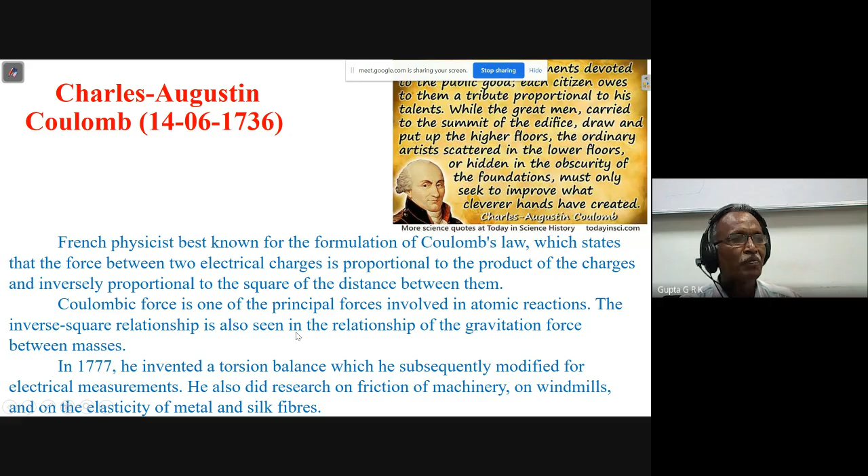Okay, today we'll start with AutoCAD, hoping that all of you have installed it. So I'm going to teach it, and after seeing it, maybe you can try.

If it were a regular offline class, we used to take you to the computer science lab, and all people would be sitting on the desktops independently, and we used to demonstrate, and all people used to practice. There used to be many PhD students and MTech students guiding the people, so if somebody had some problem, immediately that person would come and clarify the doubt, and we used to proceed like that.

But now, because it is an online class, that is not possible. So I will tell everything point by point and demonstrate it. And if there is any difficulty, I will try to demonstrate any number of times till it is clear to you. Later, you can follow the video and practice by yourself.

Anyhow, for our generation, we are afraid of computers, packages, and all. But you people are familiar with laptops, desktops, and even packages. So suppose if we take a mobile, an electronic mobile, we are completely new to it. For every small thing, every small feature, I take the help of my daughter or son, or the students around me - how to copy it, how to move it, how to send it, how to get it - every small thing. It's difficult for me to just find out how to do it, and I take the help of other people.

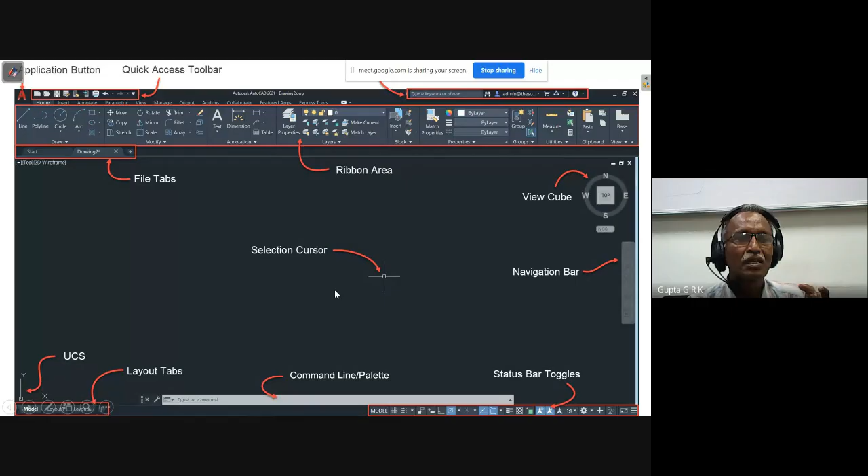This is the drawing area, and we have this cursor, and the cursor will have this plus sign and a small square in between, in the middle. When the square is there, no command is in action. Once you start giving some command, during the command this square will not be there - that is, there is some command in action.

And this XY coordinate system, this is called UCS, means user coordinate system. And here we have the command line, where you have to type the command.

You can have two choices - either you can choose from the icons, any command, or line command, you can type a command, or you can choose the cursor menu. In the menu icon, you can select.

And there is what is called a status bar toggles - this is also important. If you want a grid-like thing, you have to click this. Whichever is blue, that is selected, that is on. These are called toggle switches - it can be on or off. If there is blue color there, it is on. If there is no color, then it is off. So there are different options there.

It is like, suppose two perpendicular lines are there, this is ortho mode. Ortho mode means when you draw lines, you will get horizontal lines and vertical lines when you draw - perfect horizontal and vertical lines. Without taking that, if you want to draw a horizontal line, it may not be perfect. There may be some 2 degrees that side, or half a minute downside, or something it may come.

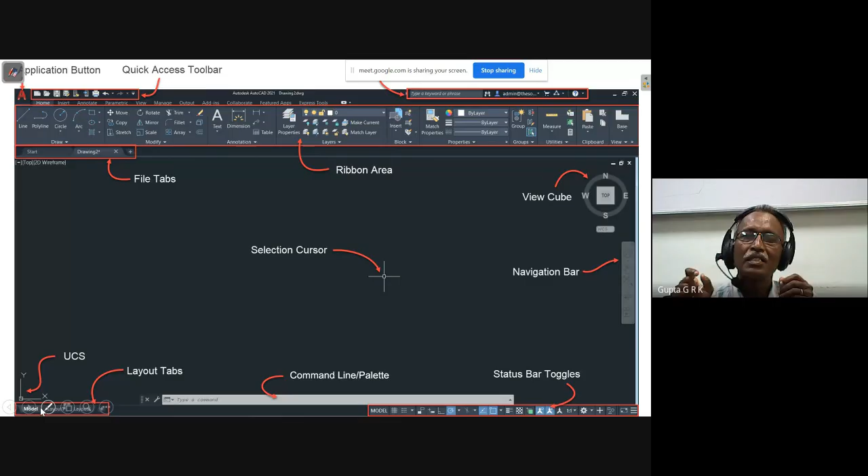If I want to select an end point or middle point or an intersecting point, exactly that point you cannot find out by using the cursor alone - the exact point if I want. If I use the object snap, when I take the cursor near to that, that gets highlighted. We will see all of them.

So like that we have various things there. Here the view cube is there - if you want to view from east side, west side, north side, or south side, how the object will change, you can see it. But whatever we are doing are 2D drawings, so we don't need all those things. When you do 3D drawings, that view cube will be useful.

There are toggle switches for all function keys. As I told you, F6 toggles between ortho, Cartesian, and polar coordinates. If you want a grid like graph sheet, you have to use F7. You can either use the icon or just type the function key.

For ortho mode, if I want to turn it on or off, if it is on it will turn off, if it is off it will turn on, just by clicking the F8 key. F9 toggles snap mode, F10 toggles polar tracking, and F11 toggles object snap tracking. So there are different things available.

F5 we will use in isometric projections. If I want to draw on a top plane, right plane, or left plane, I can do that. F5 will be useful for that. These are the various function keys.

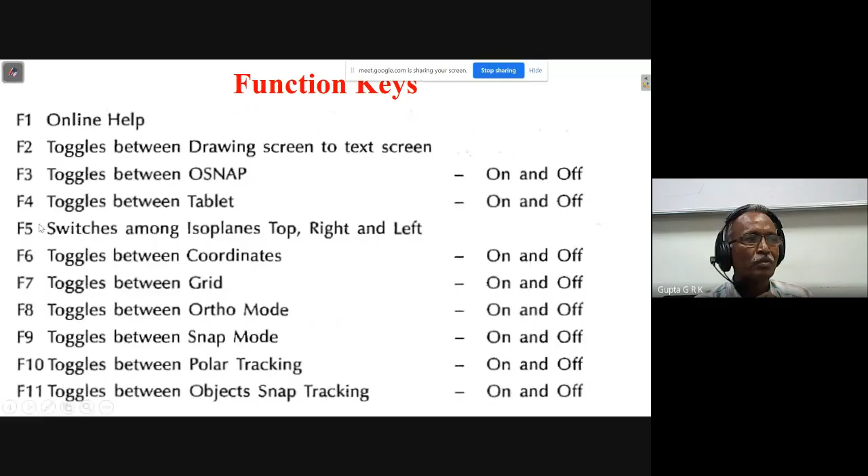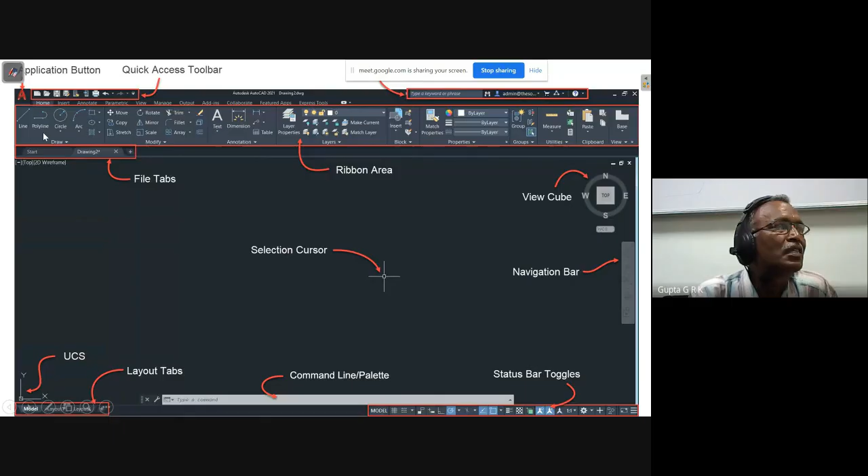So we have different options like that, these are called modify commands. So that we have seen here. Here are the draw tools and modify tools. You can see line, polyline, circle, arc, rectangle, ellipse - these are the commands. And in the modify section you have move, copy, stretch, rotate, mirror, scale - all these are there.

As I told, either you can choose the particular icon, or you can type the command in the command line. When you do, there are different methods like absolute coordinate method, relative coordinate method, and polar coordinate method. If I want to draw a line from one point to another point, you will have some coordinates.

You can give coordinate by coordinate points, or I can give the lengths also - different ways are there. One is the absolute coordinate method. In this method, the points are located with respect to the origin 0,0, and the syntax is you give XY coordinates. For the starting point it will ask, you can give XY coordinate, and for the ending point it will ask, you give XY coordinates, so that it will draw a line. Like that you can draw line by line by giving the absolute coordinates.

There is also the relative coordinate method. In this method, the displacement along the XY axis is measured with reference to the previous point. So from here to here I have drawn a line, and from here to here if I have to draw another line, the end point I can give with respect to 0,0, or with respect to the previous point. So horizontally I have to move some 10mm, and vertically some 20mm like that. I can give the relative coordinate using the at-the-rate symbol, and XY means from the previous point, the new point is obtained by moving the X coordinate by this distance and Y coordinate by that distance. This is called the relative coordinate method.

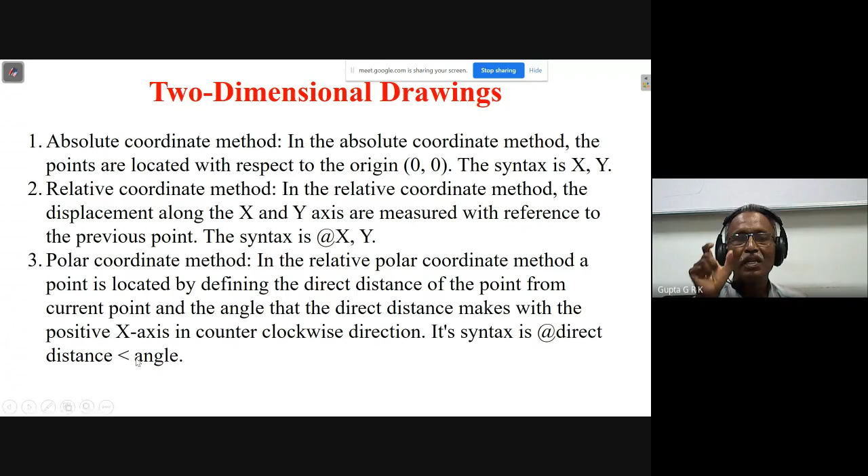End point you have to give. So how much it is, because it is 20, 20, I have to add 80 in the x direction and y direction 0. So 100, 20. In the x direction I add 80, in the y direction 0, so 20. That is the next point.

And the next point, when you go, I have to go from this point to this point. I want to know these coordinates. Because this x is 100, and y here is 20, so vertically 30 I have to go, so 50. So 100, 50. Third point, 100, 50.

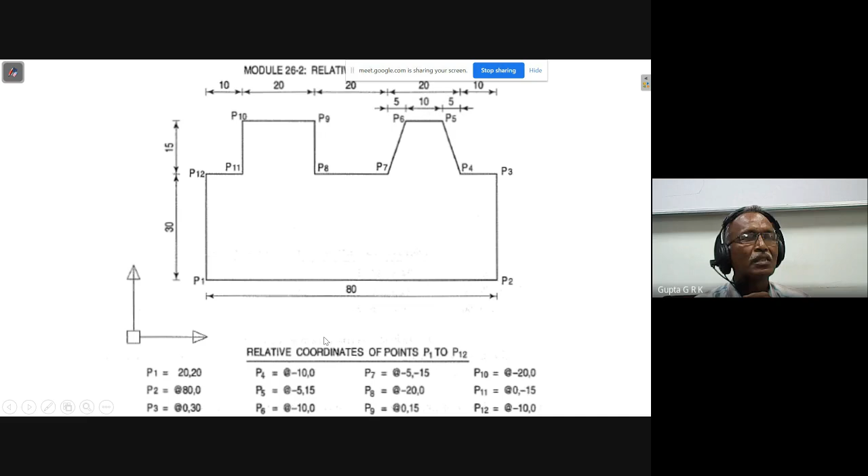And when I go to the third point, again I need not know the exact coordinates of point 3. From point 2, how much I have to move in x and y directions. So it has to be x direction 0 only and y direction 30 I have to move. So 0, 30. And from here to here, 3 to 4, this is negative x direction, so minus 10 and y direction 0. Like that I have to give the relative coordinate system points.

And suppose I do it in the polar coordinate system. Again P1 is 20, 20, and for P2, what do I have to give? I have to give the distance 80 and what is its angle? Angle of the line with the positive x-axis in counterclockwise direction. The angle is 0 only. So I have to give at-the-rate 80 less than 0.

And from 2 to 3, what is the distance? Distance is 30. And what is the angle of this line? It is 90 degrees, from the positive x-axis in counterclockwise direction. So 30 less than 90.

And P3 to P4 - I will tell some 4 to 5 points extra because you have to know the angle exactly. So P3 to P4, I have to go in the direction and distance only. I need not give minus 10, only the absolute distance I have to give. Distance is 10, and what is the angle? It is going in the negative x direction, so the angle is 180 degrees. So 10 less than 180.

And from 4 to 5, if I go, this distance given here is 15. And what is the angle? It is 108. So I have to give 15 less than 108.

And for the next point, from here to here, P5 to P6, the distance is 10. And again it is going in the negative x direction, meaning 180 degrees. So 10 less than 180.

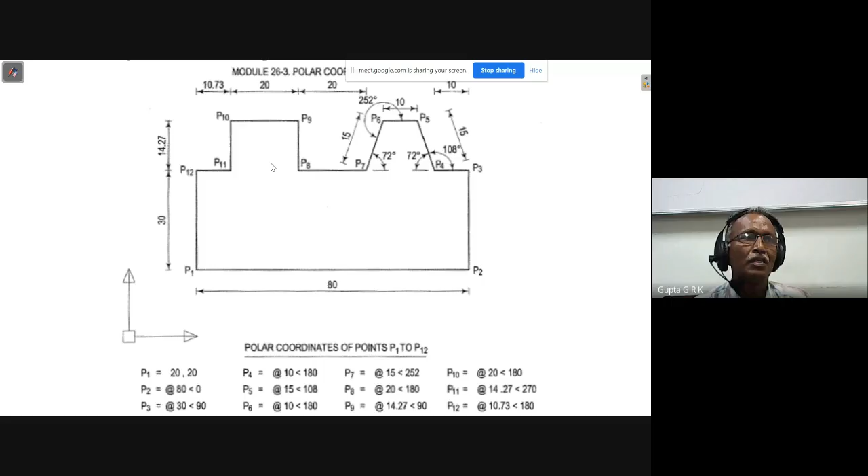Either if you know the absolute coordinates of that point, you can give it. And if you know relatively from this point to that point, what is the movement, you can give it. Or if you know what is the exact distance and what is the angle of the line, you can give it. So any data it can understand, it will do that. We will go to AutoCAD now.

Now if you installed AutoCAD, you will have this particular icon on the desktop, and I am just double clicking that, and it will open it. It may say to increase your resolution or reduce the display scale, it's okay.

So this is the way we are going to get it. As I told already, I have shown this particular desktop in the slide, so you can see this is the application, this thing.

And I told if I click on this, you will get this new, open, save and all. New, open, save, save as, import, export, publish, print, all these commands will be there. And the same things here. If you keep the cursor on any icon, you will know what exactly it means. So open, save, save as, like this you can have this. This is for printing, and this is for undo, undoing something, like that.

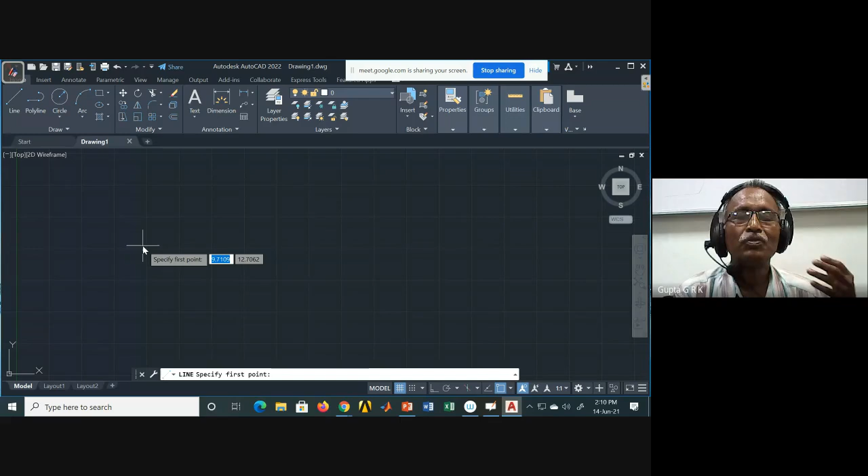And if I just click on line, I'm clicking on the line and bring the cursor here. It is not selected now. Okay, now it is taken, you can see the cursor, that square in the middle of the cursor, it is not seen. Again I am clicking escape to cancel the command. Always, if you want to break a command or cancel a command, always press escape. It is better if there is any trouble, first you type escape once or twice, suppose because you will not know some command is in action.

So if you just click on escape once or twice, that will be gone and you will get a fresh one. So here I am typing escape, you can see the cursor, now there is a square in between the cursor, in the middle of the cursor, so that means there is no command in progress. And I am clicking on line, and when I am clicking on the line, you can see on the command line, specify first point.

It is asking specify first point, and actually this is a dynamic cursor. There, for coordinates, you can see when I am moving this, the x coordinate and y coordinate, they will be changing. I can type, suppose if I type 50, that is x coordinate, and for y coordinate, you can put some 30 like that, enter. And specify the next point.

So this line is actually drawn, but it's going somewhere out. How do we fix this view? There are some things you can do with the mouse. If you press the center wheel, you get a hand-like cursor - this is called the pan command. Pan command is in order, so I can move this line to anywhere on the screen. This is called pan - just press the roller and move it.

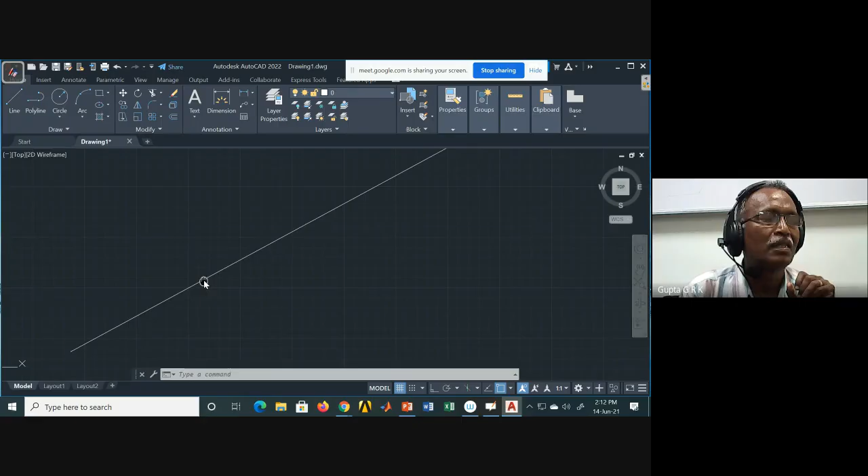When you press the roller, it becomes like a hand. So it picks that, and I can move it anywhere on the screen - this is called pan. And if I move the roller up or down, clockwise or anti-clockwise, this is called zoom in and zoom out. I'm just rotating the roller up and down for zoom in and zoom out. So like this, you can do it.

So I'm canceling this line. If I want to delete the line, I take the cursor over it and click - always clicking means left click only. So this line is selected, this object is selected, right? If I click delete, that will be gone.

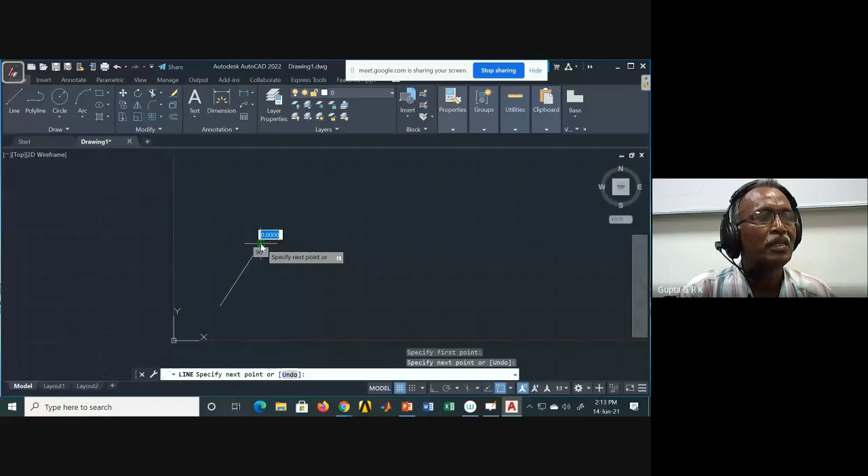So again I am taking the line command. Specify the first point, then the second point, and if I want one more line I can continue - third line, second line, third line, fourth line, like that. Once it's over, always stop the command by typing enter. So I have a number of lines drawn, and each line is an object.

If you take the cursor on that, it will be highlighted. This is one object, and this is one object, and this is one object, and this is one object, and this is one object - like that, I have a number of objects. Each separate line is one object.

So if I want, I can move and do some operation on that object. I can change the color, I can increase the thickness, I can move the particular line to another place, I can rotate that particular line, any object, right? Or I can move and rotate all the lines together.

But if I want to do this, I have to select all the lines, all the objects, and then make them like a single object. How to do that? I can join all the lines - there is a command called join. Join, enter. It will ask: select source object or multiple objects to join at once.

So take the cursor on this particular first line, click it - selected. So one object is selected, next another, next another, next another, next another, next another. So these objects are selected - 6 objects are selected, it is shown. Now once the selection is over, press enter.

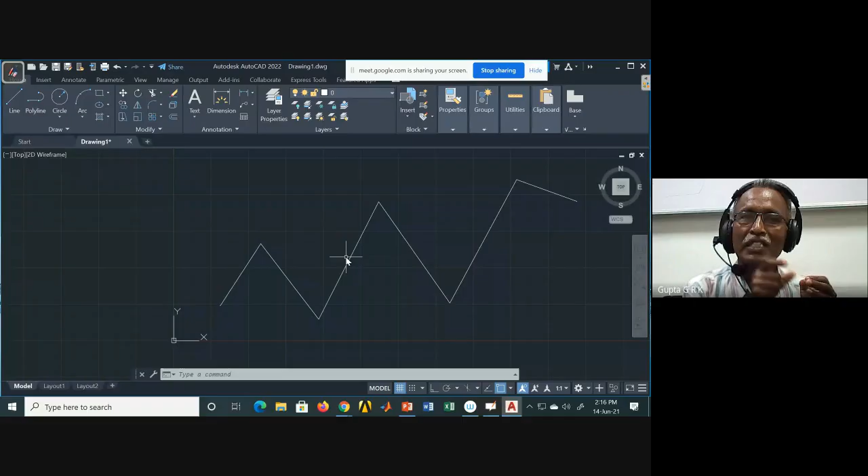Or if I want only one single line to be moved or rotated, how do I do that? Because everything became a single object, I can separate them by using what is called explode.

EX - if you type that, whatever commands are there, you can see and select it: explode. Now select the object - it's only a single object, I selected it. And once the selection is over, enter. So yeah, it is exploded, meaning all the objects get separated.

Now you can see here - this is a separate line, and this is a separate line, and this is a separate line. Like that, I have a number of lines. They are exploded, so it's not a single object now - there are 6 objects there.

And any doubt, you ask me in between, right? Another thing is selection of objects - multiple objects to be selected or deleted or something like that. Because if I want to select, it is only one object I could select here.

Here we have objects and what are called windows. What I do is click here and move the mouse this way - this is a downward window. It comes in blue, and this blue window selects whatever objects are completely covered by it.

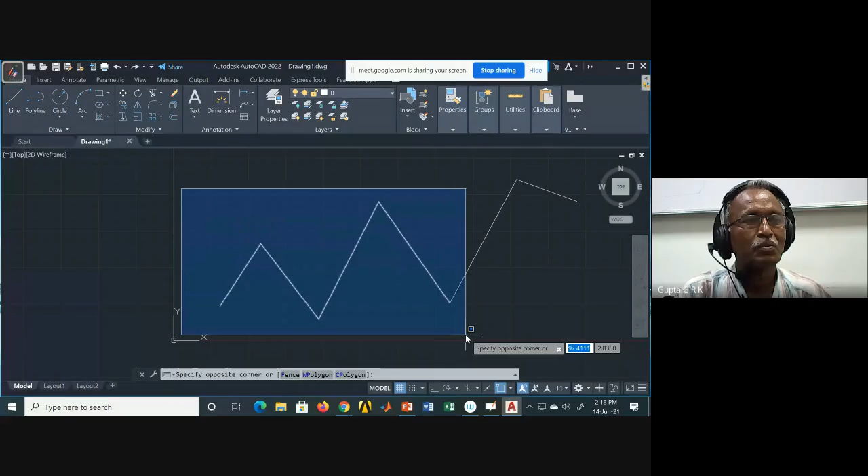I will draw the window like this, up to here, and click it. 4 objects are selected. Whichever object is completely covered by the window will be selected. Now there is another way of doing it.

I am typing escape, not doing anything. Now I take this side, click here and drag this way. This is a green window, called a crossing window. If this window crosses the object, it need not completely cover the object - whatever objects are crossed by this window get selected.

Suppose if I do it like this, how many objects get selected? 1, 2, 3... 1, 2, 3, 4 objects get selected. I will click here - you can see this is also cut by the window. These 4 objects can be deleted as well.

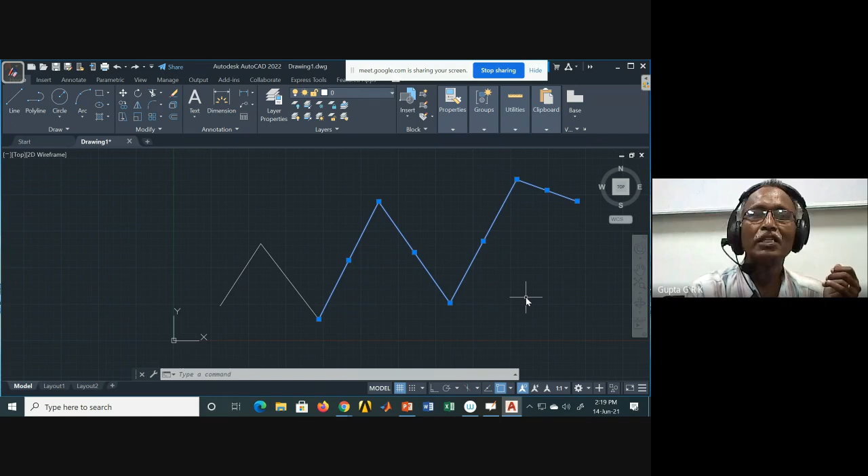So we have the blue window - if I drag it down from left to right. The green window, if you drag it down from right to left, you get the green crossing window. If it crosses any object, that object gets selected. The blue window selects an object only if it completely covers it. That is the way you select objects.

I am typing escape. Here I used the command join to join all the lines, but there is another command called polyline. If I take that, it asks to specify a start point. I specify it, and next point, next point, next point, like before. Then I type enter.

If you see, this is a single object - a single object, even though I drew a number of lines. Previously, to make a number of lines into a single object, I used the join command. Now it's not necessary - if I just draw a number of lines using polyline, all of them together become a single object. That is called polyline.

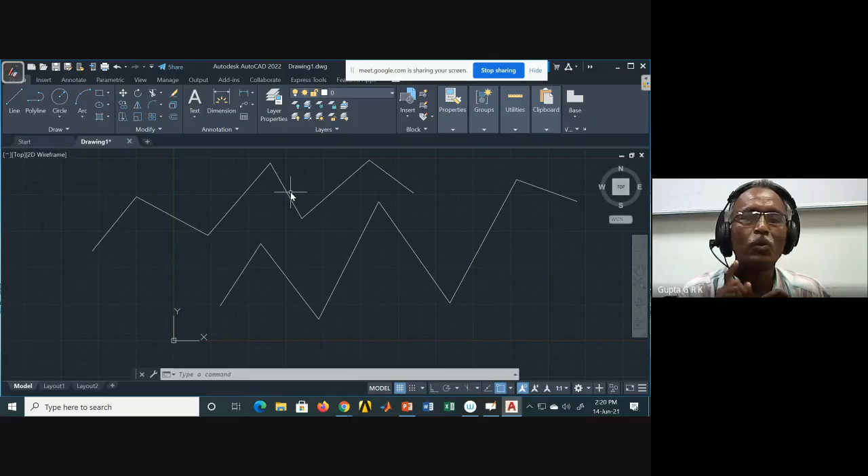Again, if you want to divide them, you have to use the explode command. Using explode, a polyline can be made into independent lines. If I click on it, the whole polyline gets selected, and I am deleting that. If I want to delete, I delete the whole thing. Delete.

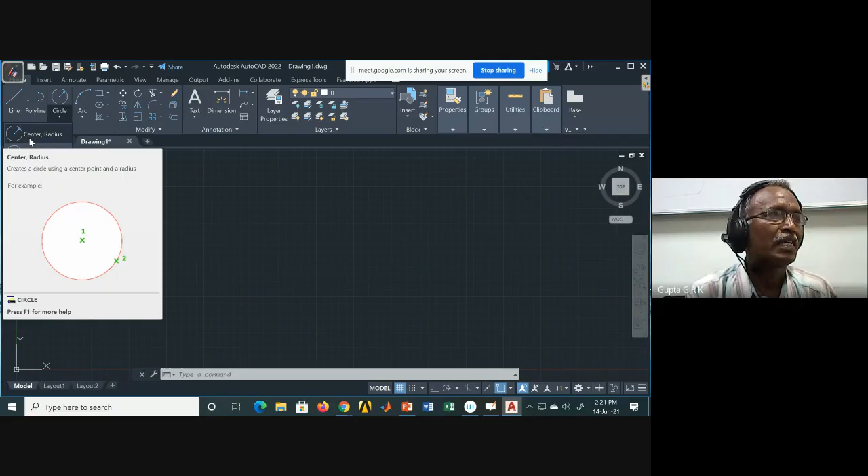Now we will do other object drawing - circle. If I take circle, it asks to specify the center point, and there are many other options. If I escape, below circle there are options: if you give center and radius, you can draw it with that data. You can also give center and diameter to draw like that.

Or if you have 2 points on the circle, you can draw the circle, and if you have 3 points on the circle, you can draw it that way too. So based on the data, I can choose that particular option. I'm taking center radius, so it will ask for the center point - you can click anywhere or give coordinates, then I have to give the radius, either by clicking somewhere or typing the radius.

Just deleting it again, taking the circle command with center radius, I click somewhere for the center. If I want a radius of 50, I just type 50 and enter - it comes like this. Because it's a bigger circle, I just move the roller to zoom out like this. So that's how I can draw a circle.

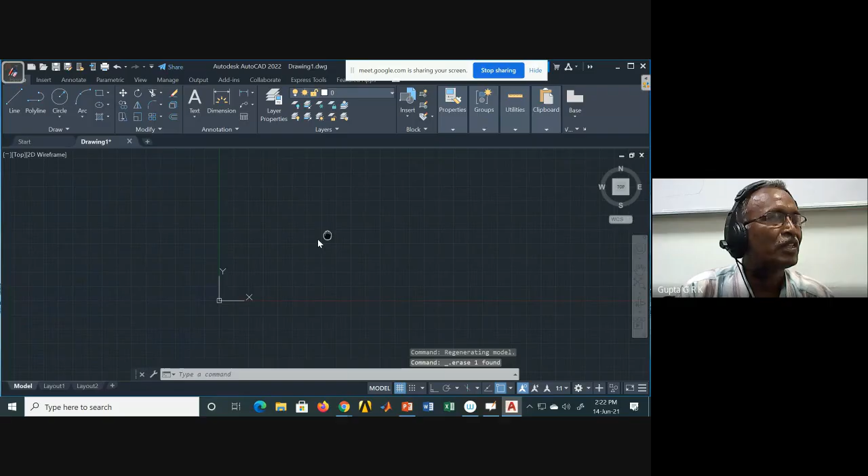Okay, I'm removing this, and I'm moving the coordinate system to this side. And the same way you can have an arc. Okay, a number of types are there. If you have starting point, center, and end point, you can do it. Or starting point, center, and angle, like a sector if I want. So everything on how to draw it, you can see the graphics thing also is coming.

So how to give that data. So here that is coming like that. Okay, that is start point, and specify arc. Okay, like this. Starting point, ending point, and center. Okay, like that I can do it.

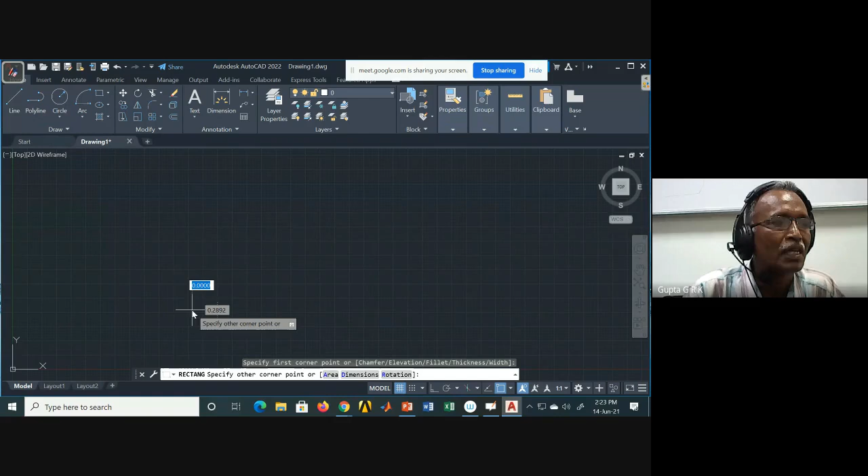And so this is important for us, polygon. So how to draw a polygon? Rectangle or a polygon? So if it is a rectangle, it is asking first corner point. You can give the coordinates or click on it, and then you can get the other corner. Again you can give the coordinates or just click it, and you will get the rectangle.

Okay, like this. Again, a polygon is a poly object. That is, it will be a single object. It is not like 4 single lines. If you are drawing line by line, all 4 sides, you will get 4 different objects. Each line will be an object. But if you draw using a polygon command, you will get a single object. So if I select it, the whole rectangle will be selected like that.

And I can do polygons like this, because these are important for us, polygon. And I want to have a hexagon. So it is asking polygon, enter number of sides. Just you type, suppose 6. Okay, and enter. And specify center of polygon or edge.

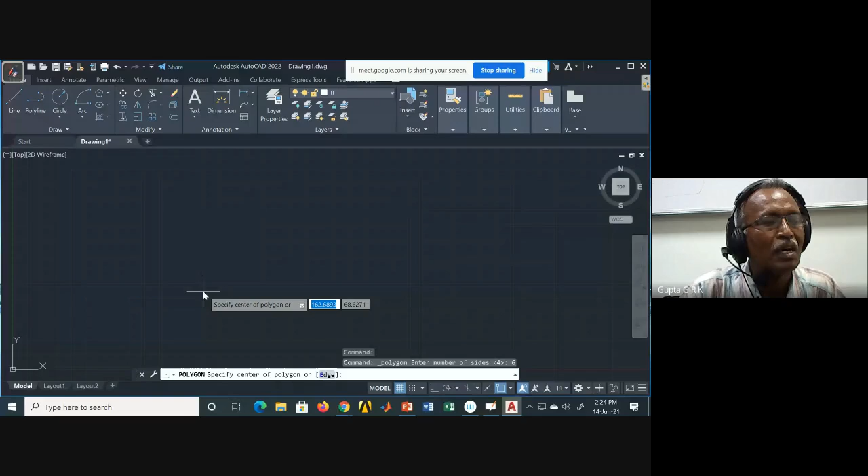Okay, usually in the problems, I will not know the center of the polygon. I know the edge length. So I have to choose this edge. Click on edge here and specify first end point of the edge. Anywhere I can just click on here. Okay, I clicked it, and specify second point. So second point I have to see, based on the second point, it may give any hexagon like this.

But I want one edge to be parallel to xy or perpendicular to xy, either like this or like this. So how to choose it? Then I have to choose this ortho, this ortho mode. F8 you can click, or ortho you can click here. Now you will get one line horizontal like this.

And what is the edge length? I can give edge length because it is changing. If I'm moving this, okay, 59, 60, 70, like that, it is changing. The coordinate, it is changing. Because suppose I want 50, just you type 50. So the hexagon, it will come like that.

And in the same way, suppose I want one side vertical. Suppose I take polygon and 6 sides, enter, and specify one point. I click. Okay, sorry, I have to choose the edge option, right? Okay, polygon, 6, enter. And I'm taking the edge option here. You should not forget that edge option.

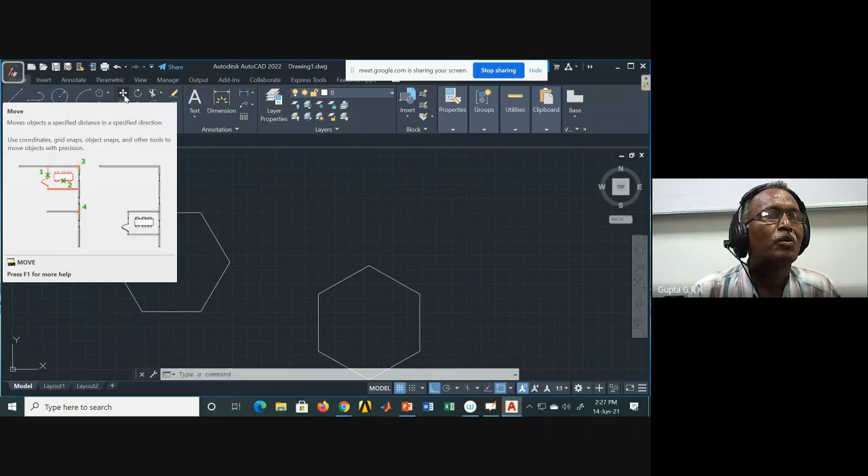Suppose modify tools. Modify tools, this is move command. Okay, if I want to move one object from one point to the other point, how to do it? I click on move, and so it is move, select object, it is coming. So I have to select some object. Suppose this object I am selecting. Click on this. Okay, and once your selection is over, enter.

And so it is asking move, specify base point. You have to give some base point which is to be moved to some other point. So here I choose this particular corner and I click on that. And move, specify second point where this first point is to be moved. So now I can move like this, but it is moving horizontally and vertically because it is in ortho mode. So I remove the ortho mode here, this ortho mode, I click it. Now I removed it. Now I can move this anywhere.

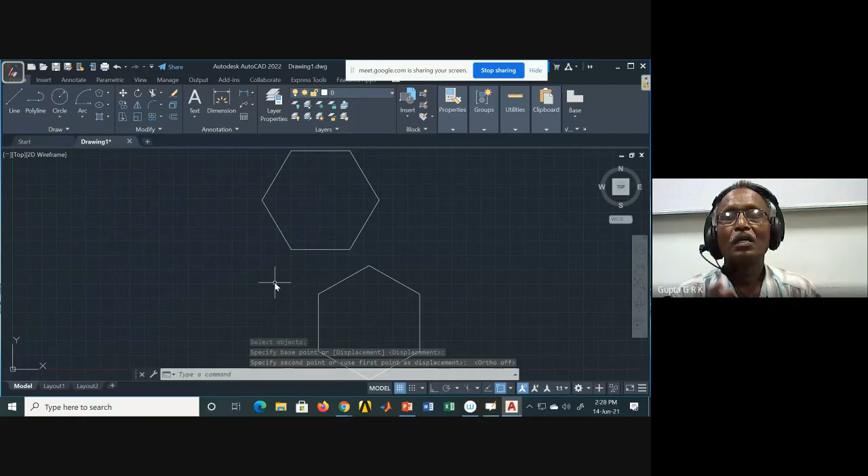Okay, so if I click here, it will be moved to that point. So the old one is gone and I got a new one. But I want to have the old one and the new one also.

Suppose you are doing projections of planes. One hexagon is to be rotated there, but this hexagon is to be there as it is, and one more hexagon I want, and I have to rotate it to some other place. So I have to copy it. How do I do that?

Below move, there is copy. This is copy, I click on that. And it is asking copy select objects, which object is to be copied. So I click on that. Again enter, once the selection is over, I have to enter.

And again, specify base point. So I am specifying this particular point. So another hexagon came. The old one is as it is. The new hexagon has come, and I can put it somewhere.

So I can just click somewhere. And again, enter, once the command is over, enter. So I have the old hexagon and also the new hexagon. This is the way I can copy one object and have another object.

Now suppose I want to rotate the object. How do I do that? One hexagon I am removing, and this particular hexagon I want to rotate. So you have the rotate command here. This is move, and then after move I have rotate.

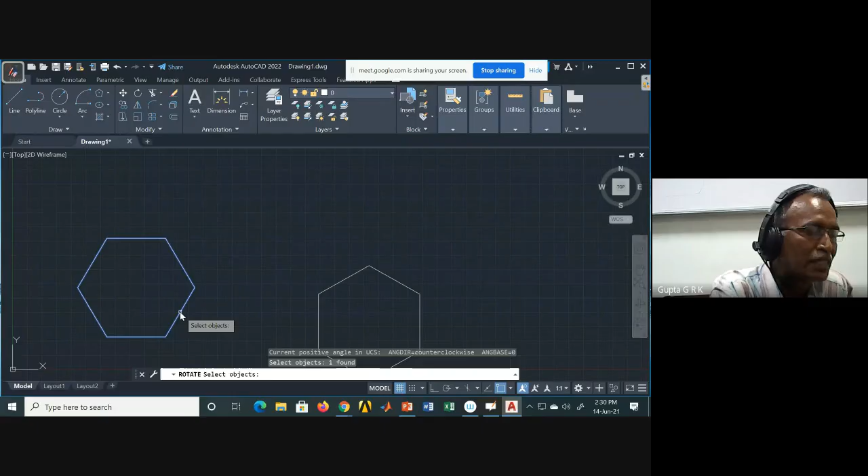Rotate is there, I have chosen that. So it is asking rotate select objects. This object I am selecting, and once selected, enter. So one object is selected, and specify base point, about which point I have to rotate. Maybe this point again I will take. Specify base point. And when I rotate it, this object gets rotated.

But I want to rotate this and copy it at some other point, so I want to have the old object and also the new object. You should not forget this, otherwise the old object will be gone and only whatever is rotated will be there. So I have to take here, there is copy and reference.

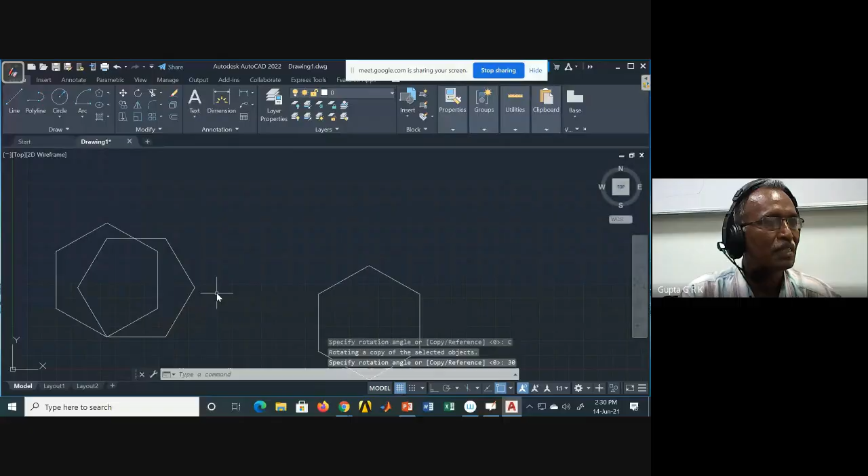You can see copy, reference. Okay, I choose copy. So now you can see one more object came like this. Now it is asking rotation angle, suppose 30 degrees. So I am rotating by 30, enter, typing 30, enter. Okay, now this is rotated by 30 degrees.

I got a new one. Old one is this and new one is this. And now this can be moved, whichever is rotated, that can be moved to some other point.

So again, if I want to move, you can choose this move object and select this, enter, and base point, and again you can move it like this. Okay, it almost came like this vertical one. I will give some other angle.

I will check rotate, selecting object, enter, specify base point, and copy, and I am giving 45 degrees. Now you can see. So now if I move the object: move, select object, enter, enter, select base point, and move it like this. So to whichever place I want, I can move it.

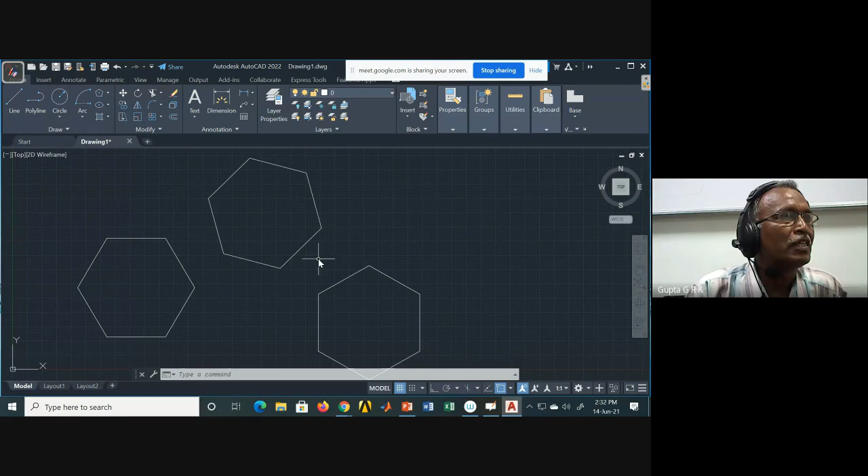This is the way we have seen the move command, copy command, and rotate command. These are the main things that are needed. And suppose another thing also - we will draw projectors, and that additional projector I have to delete, or erase. How do I do that? I will tell some easy method.

Suppose I take line. I draw some line like this, going through this point. Like this I have two lines out there. And this additional line beyond the hexagon, I want to trim it, I have to erase it. So there is what is called the trim command. For this, just type TR.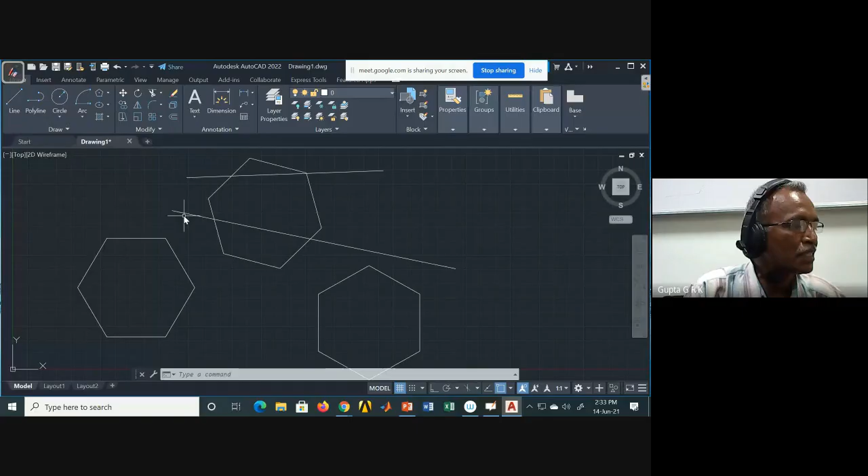Trim, enter. Now this small square came, right? So if I go to any line, and if there is a red cross mark I am getting, if I click it, that line will be erased like this. And here I take onto this, so this line gets erased. I take onto this point, this is erased. And I take onto this.

This is erased. And inside also, if you want to erase, I can move to any object. Wherever I get the red cross mark, if I click on that, that line will be erased. This is erased, right? I can erase that particular portion. This is the way I can do it.

So here, though it is a polyline, I can trim it like erasing one line. But if I type escape, I come out of the trim command. If you see again, it is a single object, right? So like that.

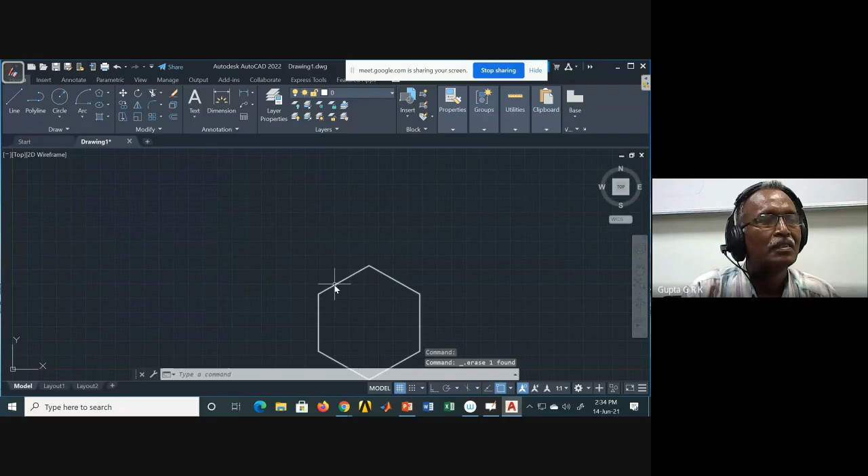Okay, I am removing this. I am selecting, typing delete. Selecting, typing delete, because you cannot see some of the things.

And I can draw colored lines. Suppose here there are properties, properties by layer. If you click on this, I will get colors. And if I choose a particular color, suppose red, and take the draw line command, I will get a red line. And if I draw another color, some green, and take another line, I can get like this.

And I take another color, yellow. I take the line command. Like that, I can draw lines of different colors.

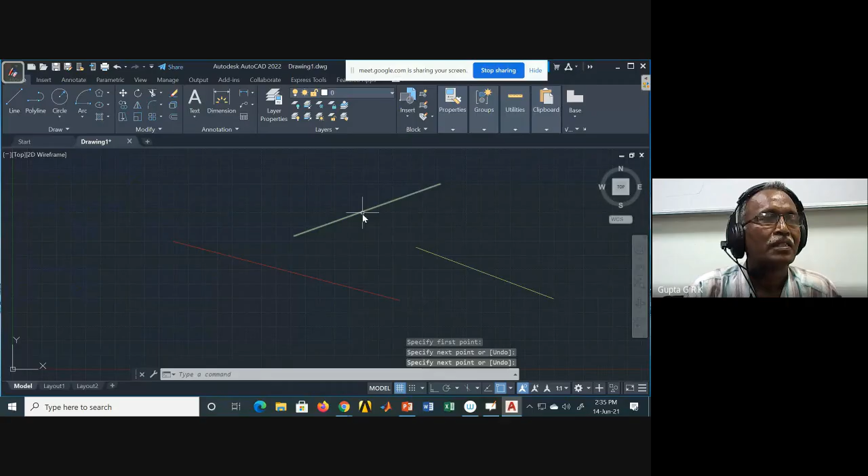And there is another thing also. So what normally happens is, I will draw all the lines, complete the problem, and suppose the final projections or views are to be given one color: front view, top view, front view, top view. In all three positions are to be given some color. I have already drawn everything with white lines. So how to do that?

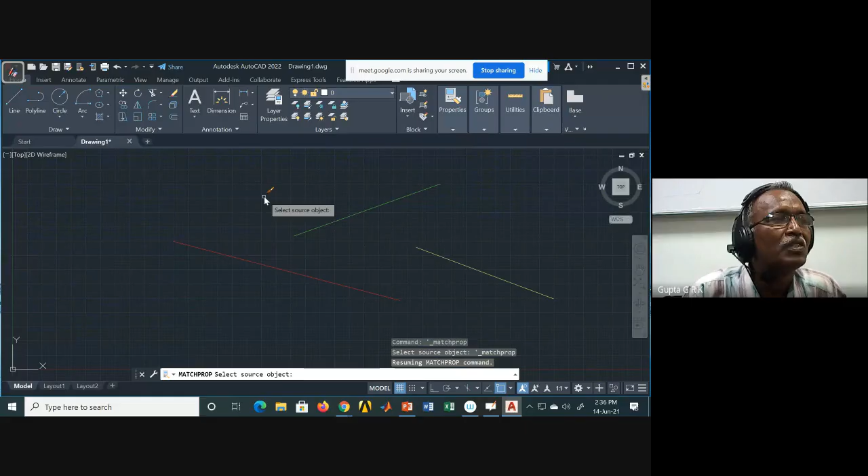Again, I have to over-draw each line, or I can use what is called match properties. If you click on this properties arrow, there is match properties. So match properties, if I select, I click on that. So if you see here, there is a brush-like cursor coming like this, and I can select one of the things -- this select source object, which is the source.

I am taking this, so that is yellow, yellow I have selected. Now I can paint on any other line. I can click on that, and I will change the color to yellow. And this also I will change to yellow. Like that, I can match properties.

One object, the source object, which has its properties, can be taken to other objects. So like that I can change the properties of other objects. This is the way. And once I do that, escape -- that brush icon, the cursor, will be gone, and again the normal thing will be there. So like that I can do.

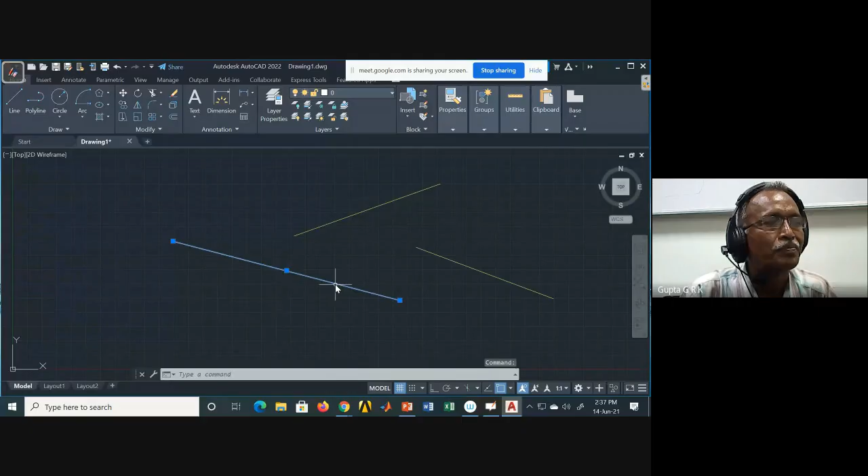Okay, now what I do is I will do a problem, the planes problem, and I will tell you how to go about it. Any doubts you can ask. And so we will take one problem.

Again, hexagon problem only I will take. Projections of planes, second problem: a regular hexagon of 40 mm side has a corner in the HP. Its surface is inclined at 45 degrees to HP, and the top view of the diagonal through the corner, which is in the HP, makes an angle of 60 degrees with the VP. Draw its projections. Okay, so a corner in the HP.

So I have to first draw the hexagon in the top view, right? Because corner it is talking about, so a diagonal parallel to XY. So like that I have to do. So what I will do, I will draw the hexagon. Take this polygon, 6 sides.

Okay, 6, and take some point here. I have to first choose the edge option. So take polygon, 6, enter, and I am clicking on edge here, in the command line. It is asking first endpoint of edge.

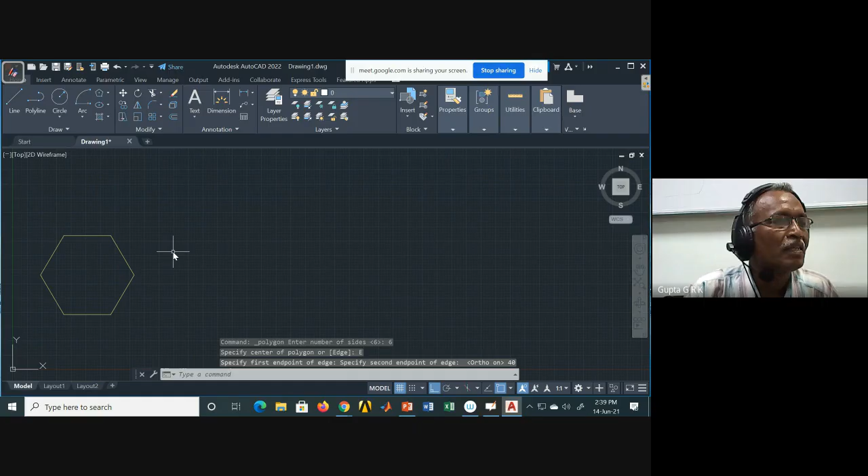and I can pan it like this.

Okay, like this. And if I want, I can move it a little bit to this side. So: move the object, select object, enter, and pick the base point. And I can remove the ortho. I can put it somewhere here. It's nice, like this.

Okay, and now I draw the XY line. So choose the line, click here, and draw a big XY line here. Okay, and enter. So I've drawn the XY line, and now I have to project them.

So here, when you project them, take the line command, and here's one more thing: there is what is called object snap, as I told. This is object snap, O snap. If I click here, I have different options: endpoint, midpoint, center, geometric center, node, like that. Usually you select endpoint, and center is not necessary, midpoint will be there, and intersection, and extension is not necessary.

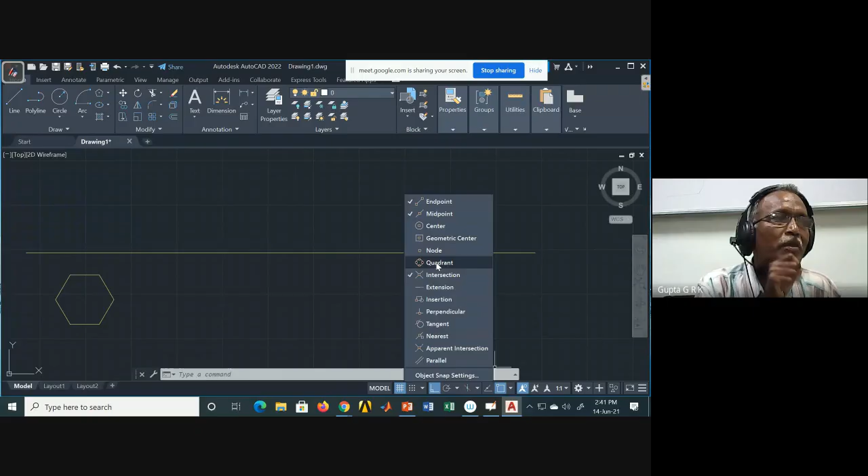These things you get selected, so that I can select the endpoint and midpoint of the lines. And intersection, where two endpoints intersect, that I can take. And perpendicular also you select - if I want a perpendicular line, that will give an indication that it is perpendicular. So mainly these four, I think, will be useful: endpoint, midpoint, intersection, and perpendicular.

Okay, I will tell you why. Now if I choose the line command, because I have to draw through these corner points, I have to select the corner point. Even if I don't put this object snap - if I remove it - and type line, I have to click on this endpoint, but I don't know exactly where this end is. Suppose I click somewhere here, and I draw up to here. So we'll see what happens.

If I just zoom it, now you can see this is not going to this point. I tried my best, but it is not going to this point. And also, if you see here, these two points are not coincided. This line and that line, it is not coincided. There is a gap. That is the problem if I don't choose the object snap.

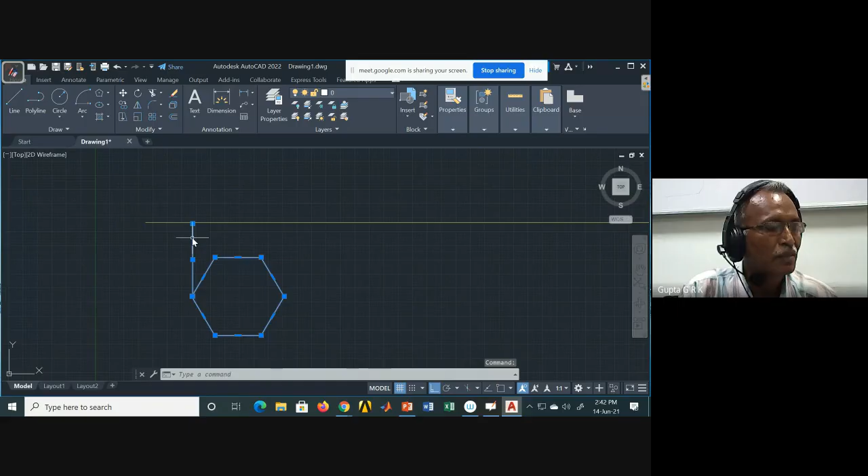Okay, I remove this line. I go undo, undo. And I want to remove only this line. Remove it. Okay, now I have it this way. I choose the object snap, I am selecting it on. And then take the line command.

Now if I take here, automatically the point gets selected. And here, see, the perpendicular line option is coming. I click there, so it will be exactly perpendicular.

So in that way, again line command - if I want to repeat a command, just enter, it automatically comes to the line command. Put this, click here, enter, again enter, click here, enter, again enter, click here, enter. Like that I can do. This is the way the first position is drawn.

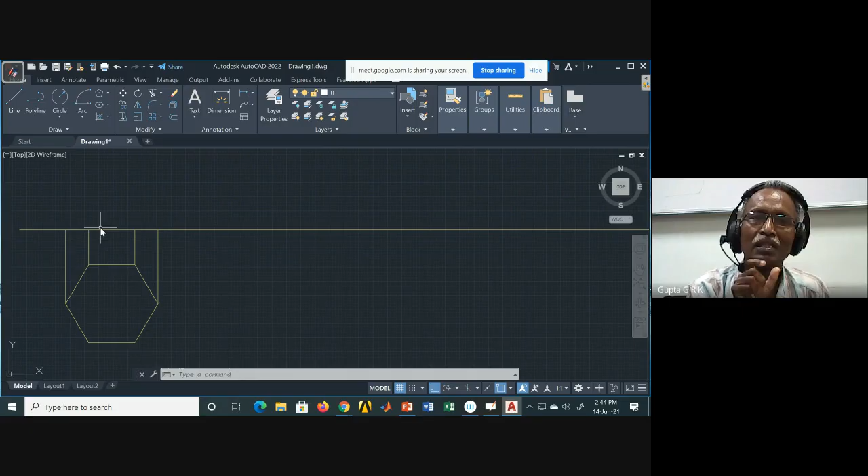And for the second position, what I have to do is give the surface angle. It is given that the surface is inclined at 45 degrees to HP. So the front view is to be rotated. Now, if I see this whole line, it is a single line. If I want to rotate this object, the whole XY line gets rotated. But I want only that particular top view, or only the front view, to be rotated. So how to do that?

So what I do is I will draw the line again on that - that is, a horizontal line over that. I remember this because these are the difficulties normally people face and they get confused. I am selecting line and clicking on this point, and the next point, and also the next point, so that there will be 3 lines.

All these 3 lines I have to rotate. Enter. Now you can see this is a single object, this is another object, and this is another object. So these are to be moved. And to which point I have to move, I have to clearly give it. So here I don't have any point.

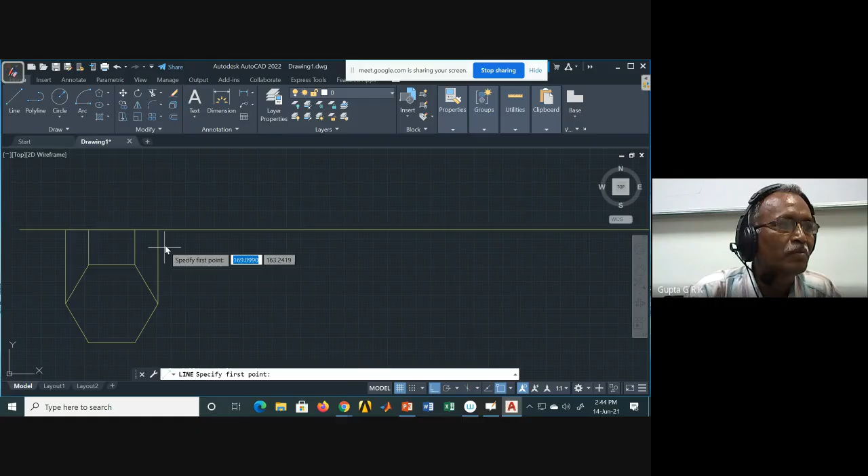For that, what I do is take the line command. I just draw a line here like this. Enter. So that to this intersecting point, I can move that front view. Now I have to move the front view, rotate it, and move it. How to do that?

Again, as I told you, I have to take the rotate command - rotate, select objects. I have to select the objects, 3 objects I am selecting: 1, 2, 3. These 3 lines I have selected. Then enter, so 3 objects are selected. And then it is asking for the base point - this is the base point. And again, as I told, I have to copy because one more line I need. So copy, and the angle 45.

Enter, now it comes like that. So here you can see there are 3 small lines. This object is to be moved to this place. Take the move command. Select objects, all the three, 1, 2, 3. All the three I have to select and enter. Specify base point, here I specify this, I move. So I can move to this particular intersecting point.

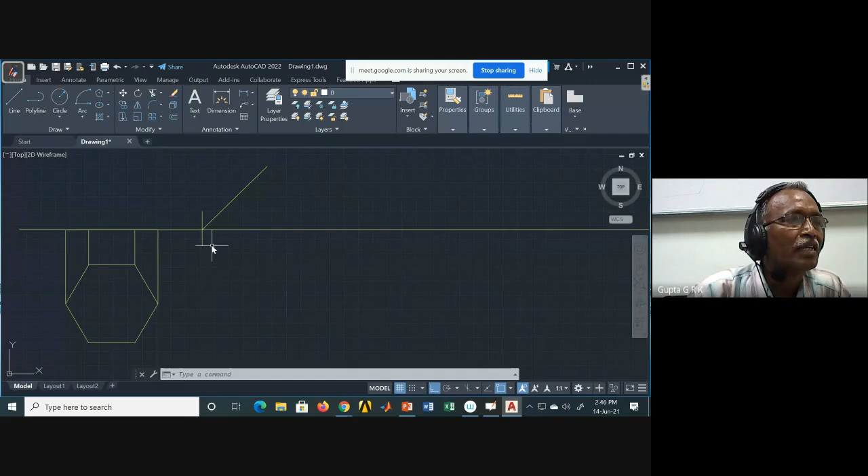Now again take line command and click here, draw the projector, click here. Enter to repeat the line command. Again, here's why I have drawn 3 lines like this. Again, I need a point here, I have to take the line command. This is the end point of the second line. I draw the projector. Enter, again enter. At this point, click, again enter, enter.

I draw this. Okay, like this I can draw. So because ortho must be on, then only you will get projectors, perpendicular lines.

Now I have to draw the locus lines. Again, take the line command and select this point, draw horizontal line, click, enter, enter. Again one more line, enter. Click here, line, click here, enter, enter. Again click here, enter. Like this I can draw these ones.

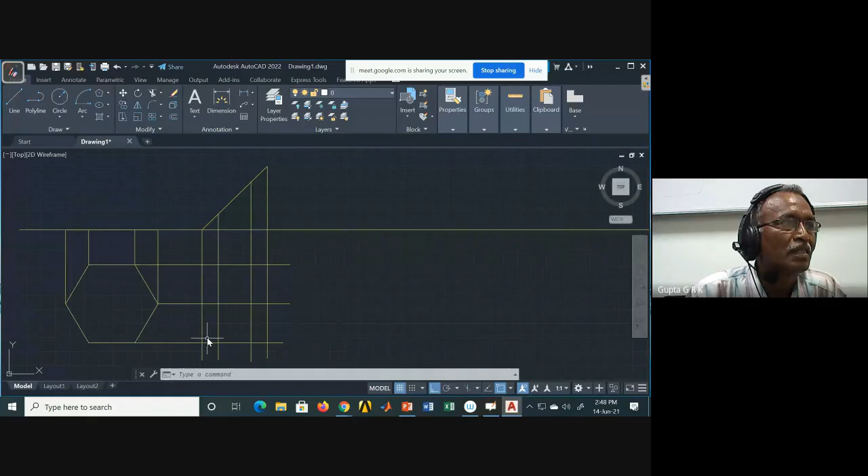Once I do this, I can draw this hexagon. If I want all the hexagon to be together, either you can draw separate lines and join them, or you can draw a polyline. I choose a polyline, and draw this hexagon from this point to this point, this point, this point, this point, this point, and this point. Enter. So that is the way I can draw the hexagon.

Now second position is over, and so third position. Third position, what is given? It is inclined, a side parallel to the HP. Sorry, the top view of the diagonal through the corner, which is in the HP, makes an angle of 60 degrees with the VP. So this particular diagonal should make 60 degrees.

So I have to rotate it by 60 degrees. How to do that? Again, rotate command, I am taking rotate. Now this is a single object, I can take this object to be selected. I select it, enter.

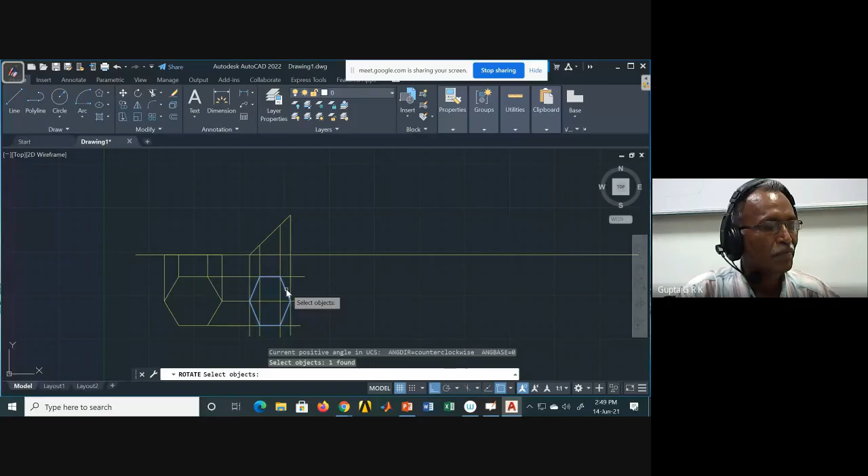And it is asking base point. Again you take this particular base point and you have to rotate it by 60 degrees. Angle it is asking, and copy command, you have to take copy here. Copy, choose, and then 60, you type 60, enter. So I got this particular hexagon rotated by 60 degrees.

And this is to be moved to right. So I again take the move command and move this rotated object right. Enter, and take the base point and move it. I can move it somewhere like this. So this particular diagonal is 60 degrees.

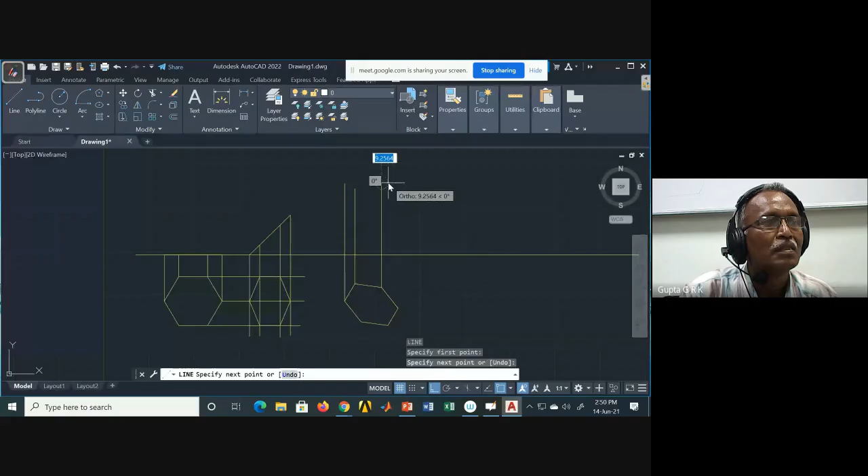So like this, and once I moved it, again you draw the projectors. Take line command and come here, click it, enter, enter, click it, enter. So like that you can draw the projectors. Again you draw the locus lines, take the line command, enter, enter. So like this I can draw the locus lines.

I have to identify A, B, C, D, E, F, otherwise I don't know exactly which is A line. Actually this is A, this point is A, and B, C, D, E, F, like that. So here also, this is A. So if you can identify which is what point, it's okay, otherwise you have to name them. How to name them?

For naming, I have to use text command.

Till now, is it everything okay? Nobody is talking anything. Yes sir, it's fine sir. It's fine, yes sir.

Now I use text command, I will type text and single line text. I choose this, and it is asking to specify start point of text. Here now I remove the object snap, if I remove the object snap only, otherwise it will go to the end point or midpoint, and the letter will come onto that point. I remove object snap here, and somewhere here I click and specify height point to default, I leave it like that, enter, rotation angle 0, enter, and text I have to type. This is the cursor, and A I am typing.

Okay, just click somewhere here. So A came here. I'll tell you an easy way to do it. Here I have to write A, B, C, D, F, but every time I need not do that. What I will do is take the copy command. Copy, escape, copy select object. Where is it? Okay, it's gone. A is to be there.

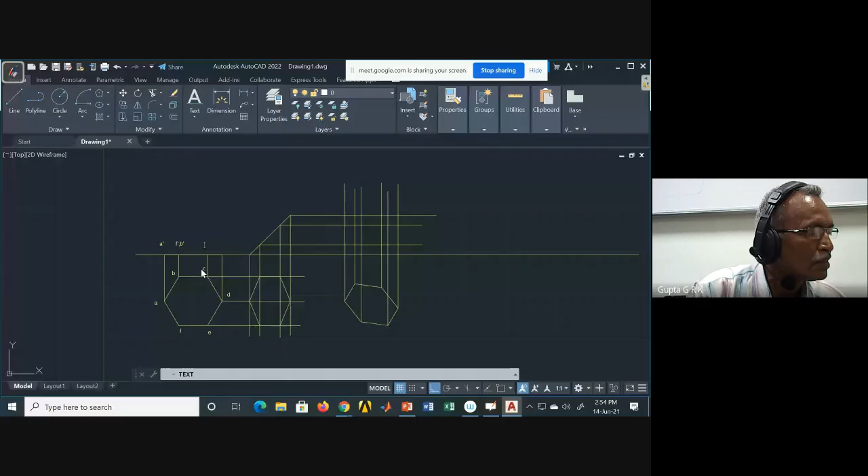Again I will take single line text. Click here, enter, enter, A. So I click there, B, click here, C, click here, D, click here, E, yes okay. So here also I can click A dash, and here F dash, comma B dash, here E dash, comma C dash, here D dash.

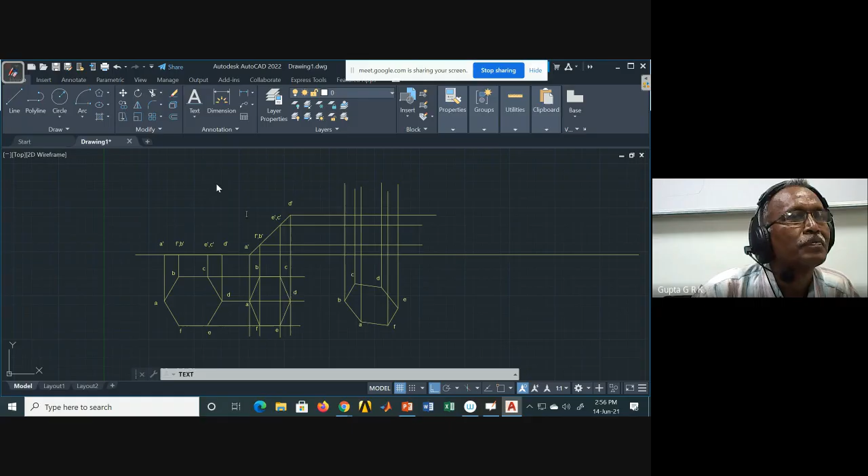I don't know, sometimes everything will be gone. Okay, that's okay. Sometimes when you type escape, everything will be gone. I have to be careful, I don't know that way. How to come out of this? I don't know, I will just take the risk. Everything is gone, okay, it happens sometimes like that. Suppose if I take...

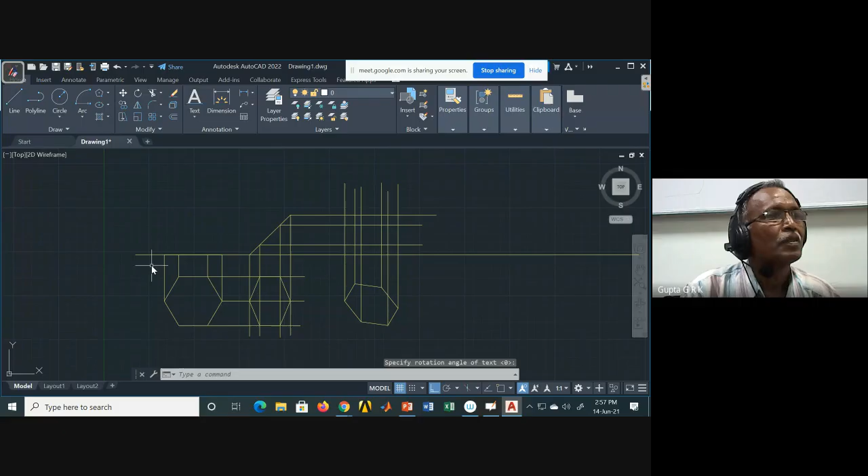I think I will save it and again reopen it. Okay, I will save it. I will give it the name drawing one or hexagon. And I will keep it on the desktop. Okay, suppose I close it.

This, it has come here, hexagon. I am clicking on that. No, it's not coming. Use open command, open desktop hexagon. Okay, it has come like this.

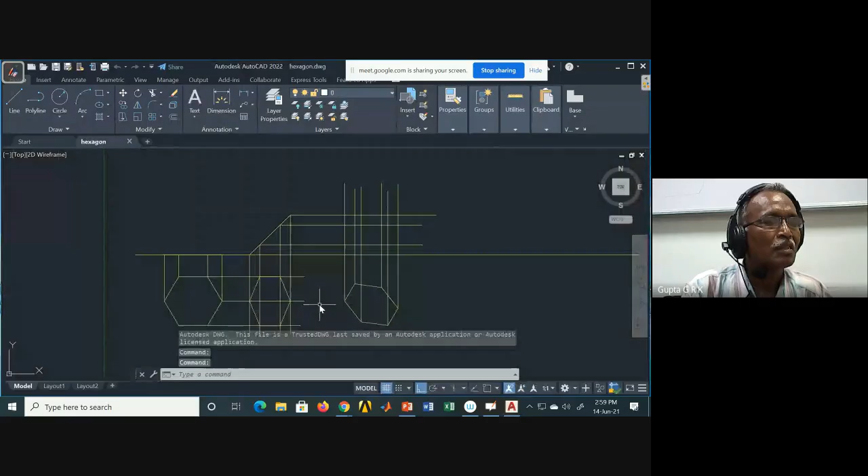Okay, now I will again take text, single line text. Enter, enter, yeah, okay. I will, sometimes this problem comes, I don't know exactly, so I can do like that. Okay, here this is the A line, so this is the A dash line. I will start with this point.

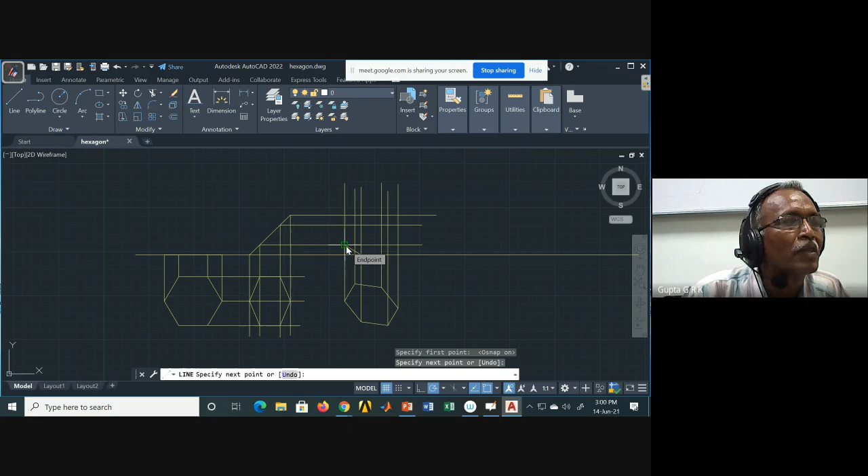Okay, so this is O snap, object snap I am taking. This is A, and the next B point will be this because it is B, and the C point will be here, and D point is here, and E point is here, and the F point is here, and there. Okay, this is the way I'll get the answer.

Okay, so now these extra lines, if I want to trim, I can use trim command, TR, enter, and I can remove this, this, this, this. I can trim all these things. Okay, like this I can trim. And here also I will trim it, like this.

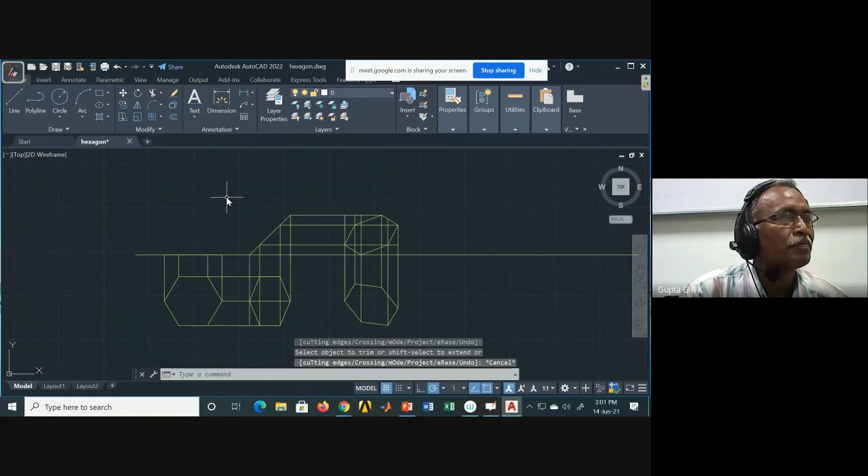Okay, and dimensions I have to show, so this also I will tell you. Escape. So here dimensions: aligned dimension, angular dimension, linear dimension, like that I have. And because I have to show the side, I will take align from this point to this point. Okay, so that is, but I don't see dimension, arrow, and anything, I don't see.

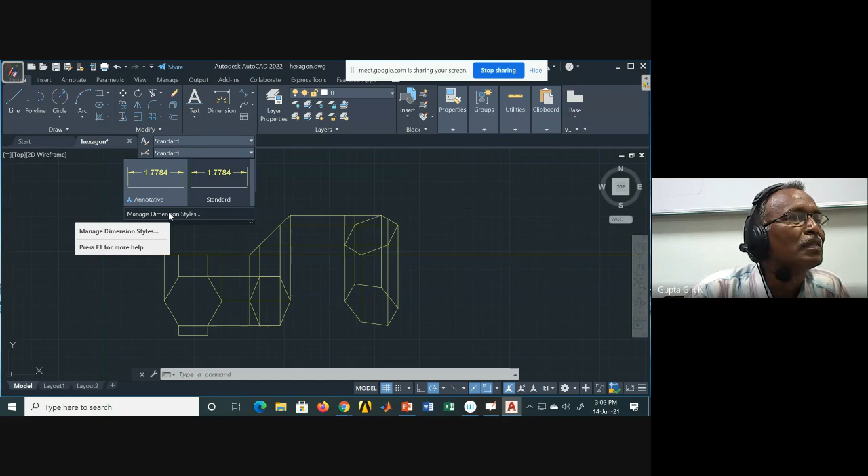So I have to change the sizes of that. So here at the annotation, you click the down arrow. Here in the standard, second one, dimension style is coming, right? So you click this one and manage dimension style. Manage dimension styles, you type it here. Here you have to take modify.

Okay, so here you can give the size. You can give the text size, the arrow size, and all. Here, because it is 0.38, text size is 0.18, I will give something like, I don't know exactly which suits, so I will give some 0.4, okay? Just giving like that, I will check. Okay, I will close.

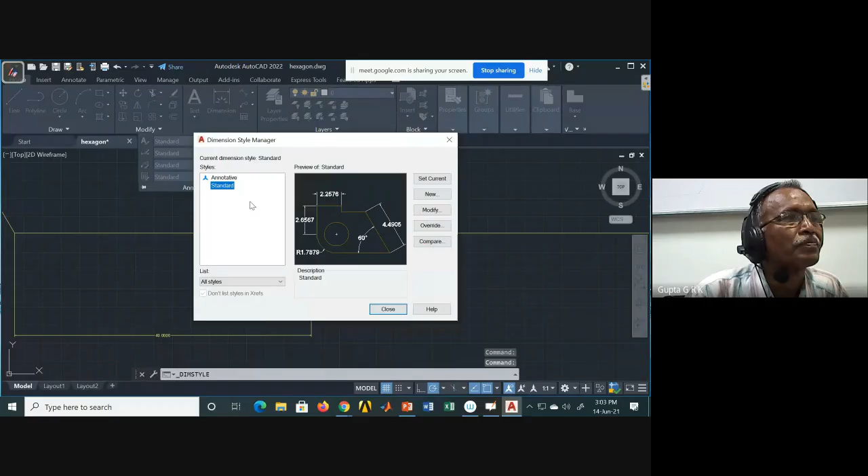Actually, this 40 is there, but that is of small size, and I have to still increase the size. Modify text, 4 means I go to... I think 2 is still smaller, and I can still increase the size, maybe to 3.

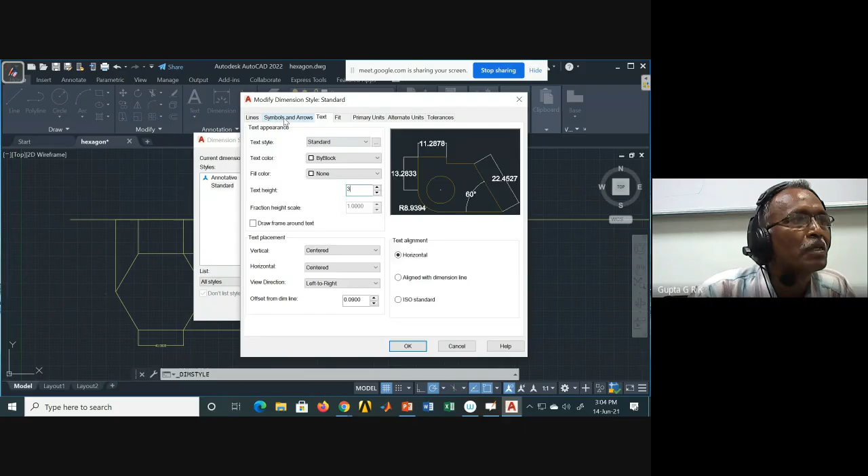I'm giving 3 for the symbols and arrows, so I can see the arrows better. I'll put the same size, 3. Also, decimals are coming, so I can remove that. If I take primary units here, I can remove the decimals and put 0. Okay, close. Now I can see this properly - arrows are okay, dimension number size is okay, and decimals are not there.

Now I want to show the angles, so angle for this particular line. Go to this thing, take angular dimension, between this line and this line. You can see this is 45 degrees. So this you can show like that.

And again, for this diagonal, I have to show 60. First I will draw the diagonal line. Enter. Take angular dimension here - this line and this horizontal line. So like this. Escape, in this way I can draw. Okay, so this is the way we can do it.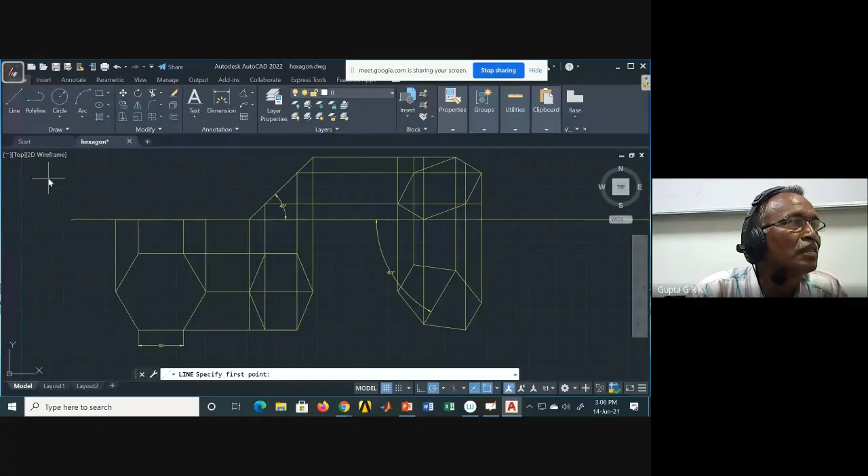As I told, if I want to change the colors of this particular final view, suppose if I take properties and make it red, and draw a small line here. So to that line's color, I can change these objects. Go to properties, match properties, take this source color, and I can change this color - these three, this, and this.

Or actually you can change the thickness also. If I take this properties and go to this, I can change the thickness of the line. It was 0.3, so you can get a thicker line like that. In that way you can change the thickness, but the color is simple actually. So like that you can do.

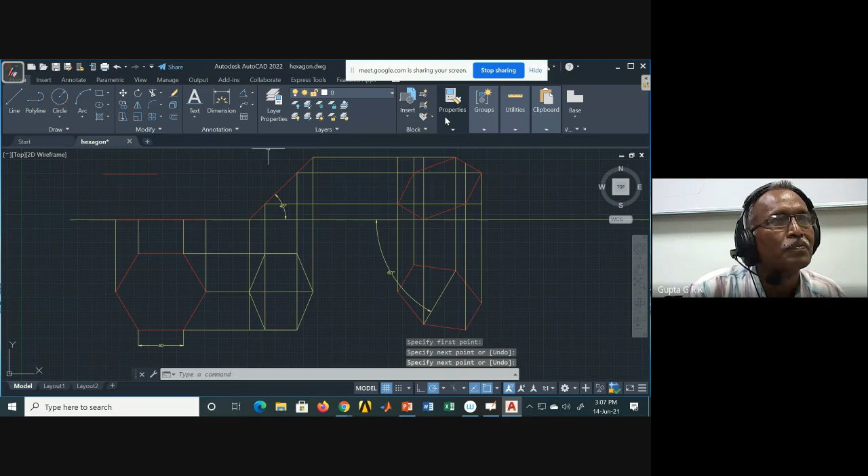Okay, like this, only that text only. Just again I will try. I will better save it in between. Okay, I will save it. Text, single line, click, right. Enter, enter.

And typing escape, it's going off - sometimes it happens, I don't know exactly why. I will check that again. I don't know exactly what is happening, but the procedure is that only. Sometimes it gives trouble like that. Again, I will close and reopen it.

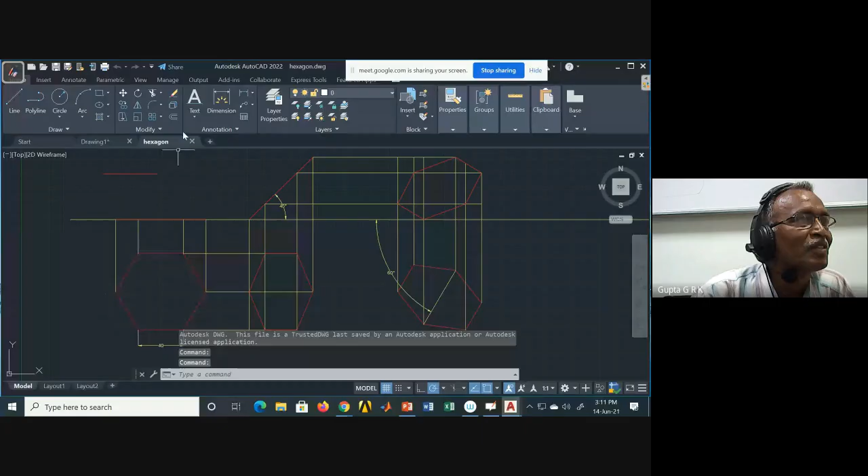I don't know in that figure, I don't know why it is not happening. I will do that again. Open. Hit 7. Now again I will do it. Okay, that's the way you have to do it. I don't know why it's happening - I will find out why sometimes it happens.

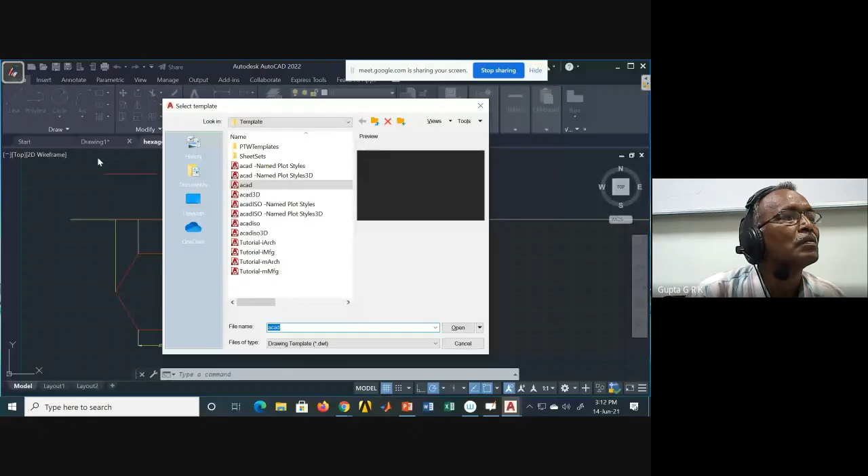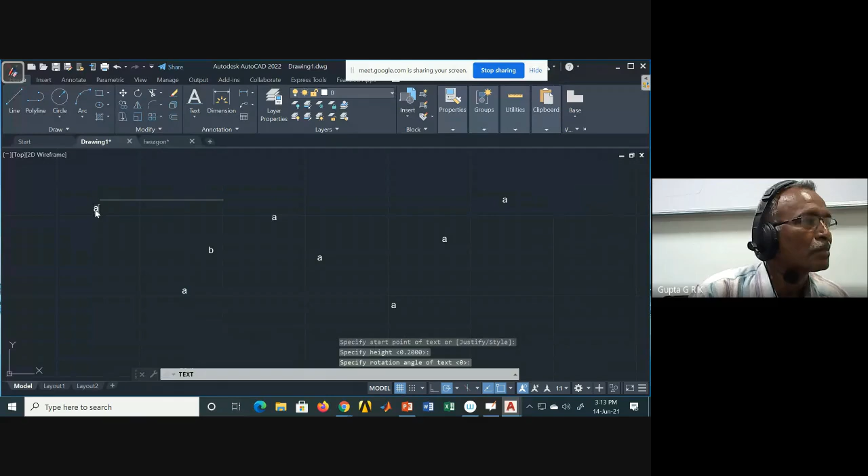Because in a new drawing, it is coming like this - new. In the new drawing, it is happening, it is coming like this. Can we take another one? It is coming here, I don't know where - even if I type escape, it's not going. But in that drawing, it is going off. Anyhow, I don't know what is happening. Okay, this is the way. Any other doubts?

Sir, can you explain how you're getting the colors? Okay, I will tell you. You go to these properties, and the top one here you click on this. You will get any colors - choose any color, draw any object, you will get the object in that color. So I am taking green. Now whatever I draw, taking line and drawing like this, I will get green only.

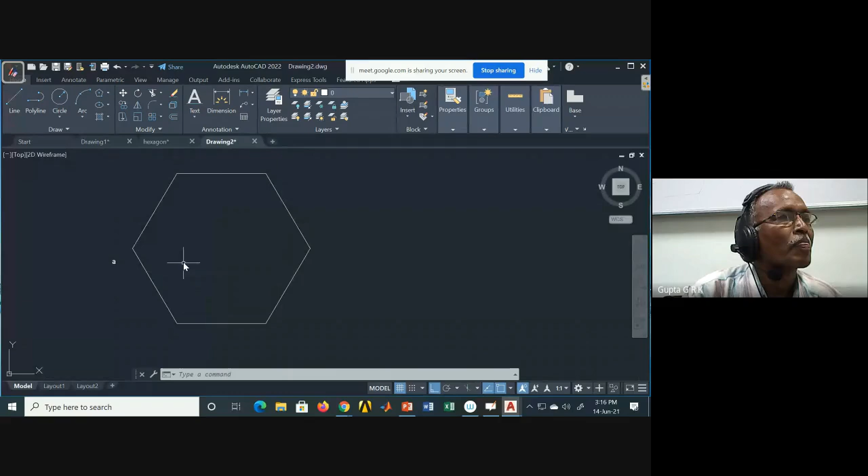Sir, how do we write A dash, B dash, C dash, can you repeat once again? That's what I am not getting here. As I told, the method is like this. I'm going to a new one. I will draw a hexagon, polygon, 6 sides, and edge - click here, take ortho, click here, enter, and text, single line. I click here, enter, enter, A. Okay, so this is the way it comes. And again, you can change the text size if I want.

So once I get a letter like this, again a single line text I will take. Size I am changing to 0.4.

Okay, like this, suppose if I get this, I remove the smaller one. Once I get this point letter, I take the copy command and click on this. Copy command, select the object, enter, specify base point on the same point you can try, and remove other, and I can click wherever I want the letters.

Enter like this, and double click on here, you will get A. Double click on this, you type C, and double click on this, and if I want D dash, suppose I can type like this. Whatever I type, I will get that.

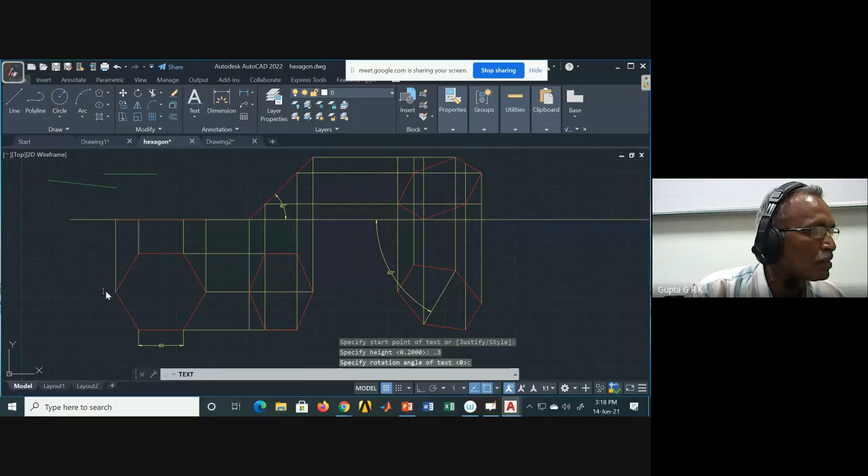Sir, can't you press enter? Yeah, if I put enter, it is coming to another line. Just you will see what happens. Okay, now I type A now. If I type enter, it is coming to the next line there.

It's coming A now. No, somehow it is going off. A coming. And like this only, if I take it to some other one. And if I put escape, everything is going. I don't know exactly what is happening, but the procedure is right, like that only.

Okay, I will check if I get some answer for that. I will let you know. Any other questions?

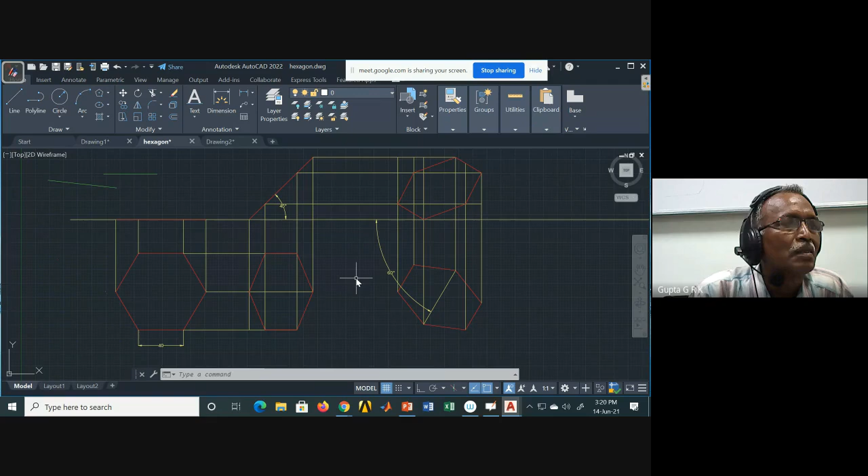So whatever is needed for our particular projections, I told only those things. There are so many features are there, right? So some more features I will tell you when we go to solids and all.

Okay, your next assignment is your planes problems. Whatever you have drawn conventionally, you have to draw in AutoCAD and take screenshots of all the problems and add them like a PDF file and submit it.

And you can submit it. Which all you have to do, sir? Planes assignment already you have done conventionally. Yes sir. Those conventional problems you have to do in AutoCAD.

Is it clear? Yes. Okay sir. And you can submit it after your minor exams. I will give you again like an assignment. I will give it in your Google Classroom. Right?

And another thing is, though I am giving some due date and I am accepting all the assignments till I start correcting it, I am not doing correction immediately on the due date, right? I'm taking one more week. So at that time, whoever has submitted, I will give the full marks only. I will correct it for full marks. But at that time also, when I start correcting, if somebody has not submitted, I will give 0.

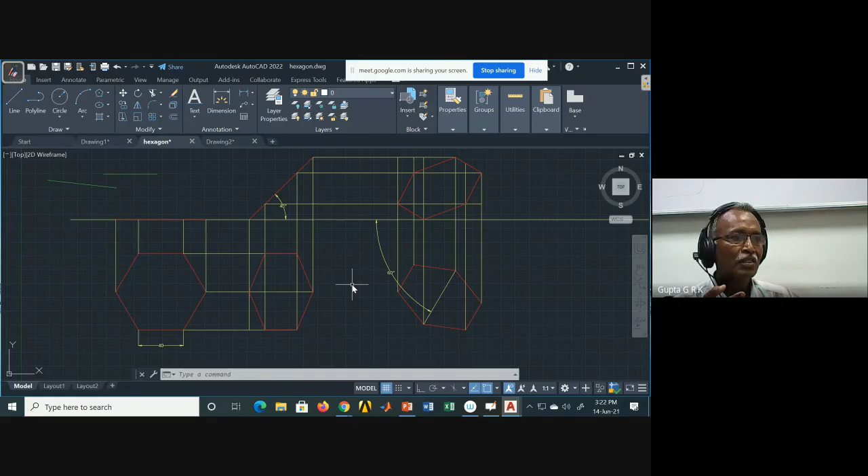I think you can learn by yourself very fast. All are quite user-friendly packages. Only this text one I got some difficulty. I will let you know if there is something tricky there. But as I told, it's coming in the other drawing, new drawing, it is coming properly. And I could change it, I can make it in that particular drawing, it's not coming.

Okay, dimension and other things, I told you how to change the things. Again, I will tell you in the annotation, in the second one, if you click dimension style, you get, and here you have to modify, and here text size, you can set here.

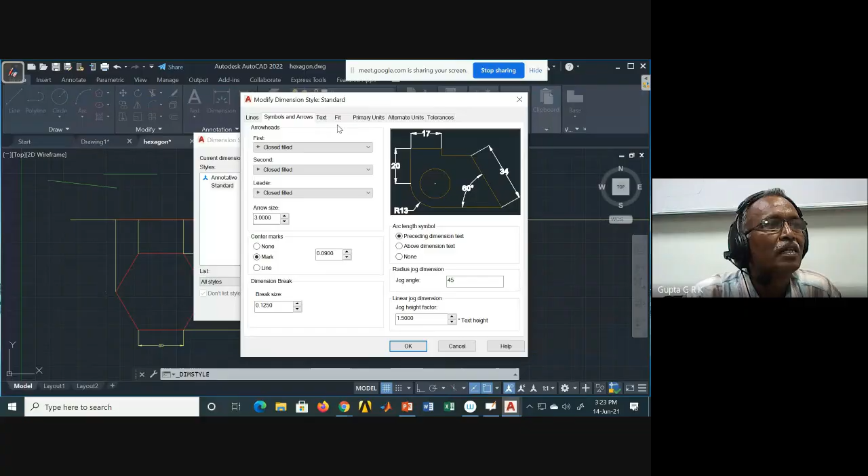You can modify the text size. Same text size, you keep symbols and arrows are there. Arrow size you can change here, like that. And here in the primary units, if you are having any decimals, you can remove that by clicking 0 here.

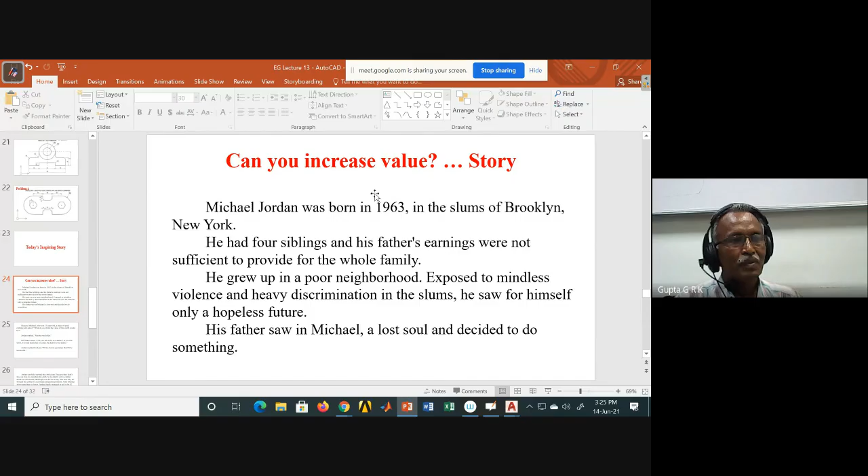Michael Jordan was born in 1963 in the slums of Brooklyn, New York. He had 4 siblings, and his father's earnings were not sufficient to provide for the whole family. He grew up in a poor neighborhood, exposed to mindless violence and heavy discrimination in the slums. He saw for himself only a hopeless future. His father saw in Michael a lost soul and decided to do something.

He gave Michael, who was 13 years old at the time, a piece of used clothing and said, 'What do you think the value of this outfit would be?' Jordan replied, 'Maybe $1.' His father asked, 'Can you sell it for $2? If you can sell it, it would mean that you were a big help to your family.' Jordan nodded his head. 'Okay, I will try, but no guarantee that I will be successful.'

Jordan carefully washed the cloth clean because they didn't have an iron. To smoothen the cloth, he leveled it with a brush on a flat board, then kept it in the sun to dry. Once he made it right, the next day he brought the clothes to a crowded underground station. After offering it for more than 6 hours, finally he managed to sell it for $2. He took the $2 bill and ran home. After that, every day he looked for some used clothing, washed and ironed it, and sold it in the crowd.

More than 10 days later, his father again gave him a piece of used clothing and asked, 'Can you think of a way to sell this for $20?' Aghast, Jordan said, 'How is it possible? This outfit can only fetch $2 at the most.' His father replied, 'Why don't you try it first? There might be some way.' After breaking his head for a few hours, finally Jordan got an idea.

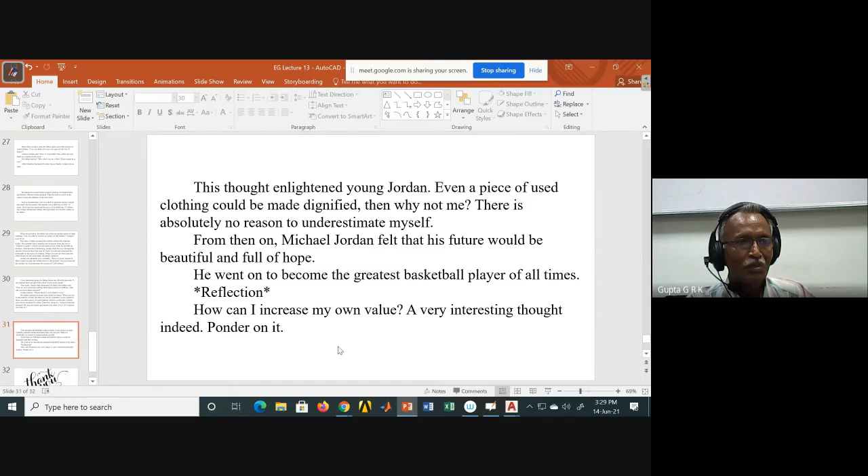So, reflection: how can I increase my own value? A very interesting thought indeed. Ponder on it. Thank you very much. It's a very, very nice story I like to share with you. Thank you.